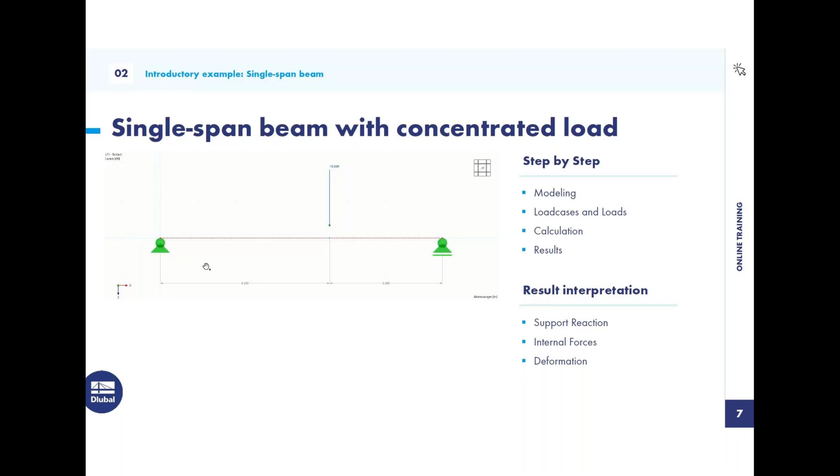Okay, then let's come to our first example. A single span beam with a length of 7.50 meters and a nodal load of 10 kilonewtons. First I will show you the modeling, then how I create such loads, then we will calculate it, and with Mia we make a check. So let's switch to RFEM. Okay, back to the user interface.

So, for example, nodes are the beginning of every model. Nodes are the start, and on these nodes you can put lines or members, and surfaces need these lines as borders. So for nodes, you can start here in the navigator data and click for a new node, and I will show you.

You can also do it here in the menu, under basic, nodes, or in the table you also have the option to create nodes with the coordinates, or even here with the shortcut. So you see you have different ways of modeling. Okay, then let's start. I will close this, and start with a new model. I call it online training.

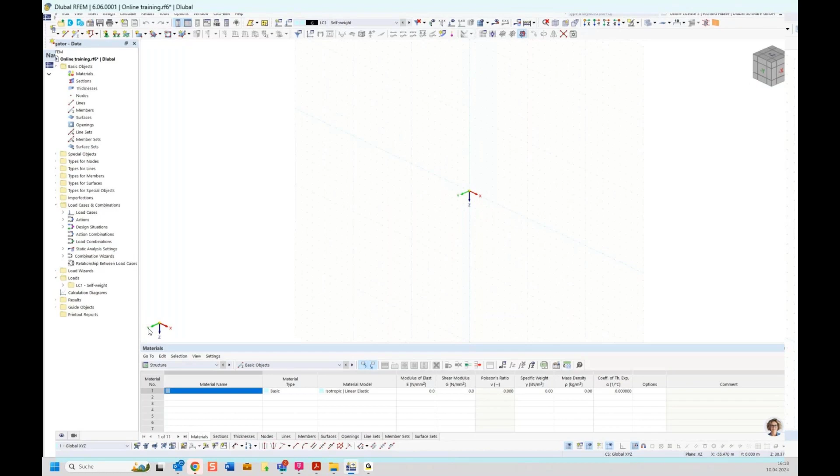Maybe a word on the view cube before we start modeling. You can left click on this cube and switch the views. As I said, it's connected to the global axis system. You see the Y direction when I click on Y, or when I go to X. The same idea applies here with views in X, Y, Z, or you can choose other directions here.

Another option: when you press Control and the middle mouse button, you can also rotate here. Okay, but let's start with the modeling. Our system, as I said, is a 7.50 meter long single span. So let's begin with the nodes.

I choose the shortcut here and left click on the 0, 0 coordinate. And now we have the first little problem. When I go here, we see 4 meters, and when I go here, 5 meters. We want it in the middle. Now we have different options.

First, I can click on this node, and in this case it fits perfectly because we start at the 0,0 coordinate. Then I could change the X coordinate to 450 and say OK. And now you see, OK, it's on the 450 how we want it.

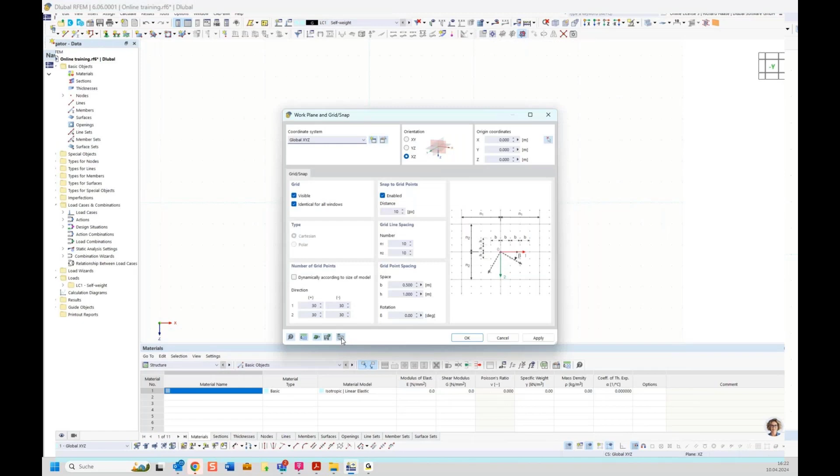Okay, then we need the last point at coordinate 750. Let's do it in this way. Okay. And maybe I set it back to the default setting. You can also do it here. Okay. So now we have 3 nodes. Oh, maybe I showed this before.

So when you left click and go from left to right, you see this color, and from right to left, you see this blue. So maybe I will continue first with a line. Let's go to the node, to this one, and again to this one. So when I go from left to right with this orange color, for example here over this line on this node, you see only this node gets selected.

But when I go from right to left, you see the line and the node are selected. So you have both options. With the orange color, only the objects completely inside this rectangle are selected, and with the blue you need only a little of the object and it's selected.

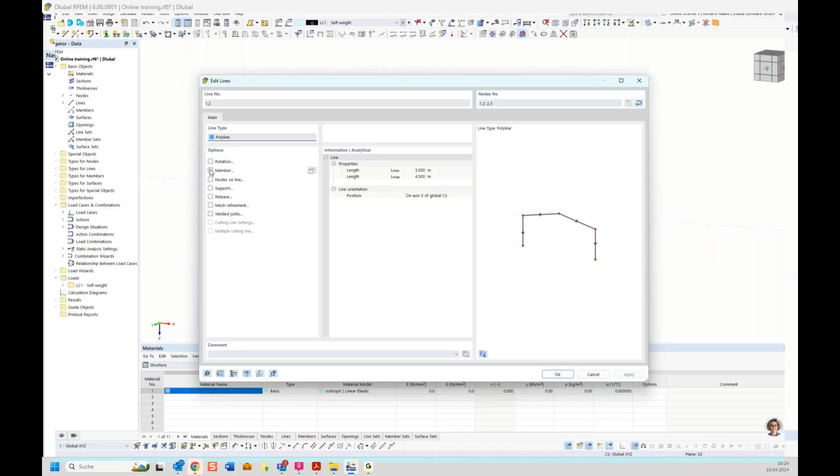So we have this line and want to transform this line or give this line some properties, and we say, okay, we want to transform this line to members. Then a new menu opens, the new member menu. And what can we see here? A member type. The beam is, I'd say, the default type. The beam gives all forces to other objects.

So, for example, when we go to tension, you can always orient yourself with these pictures. We see here all forces for the beam, and for tension you see only tension forces can be transferred to other objects. The same for compression, here only negative forces.

But let's go to another member type. Here is definable stiffness. Maybe it's interesting for you in your study time. You see we have a new tab here, definable stiffness, and we can create a new stiffness type here. And here you can manually define all stiffnesses, torsional stiffness, bending stiffness, and so on. Maybe it's perfect for your book exercises, and you can manually create your beam in this way.

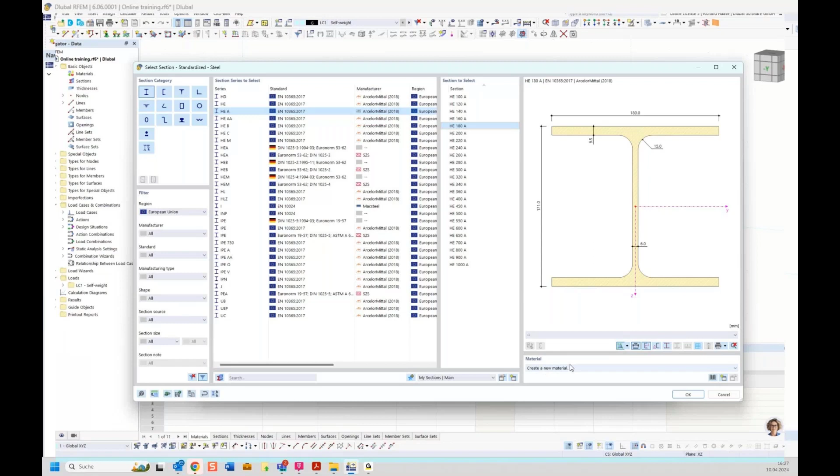Here also, what I said before, we start from a section. So when you create cross sections which are not tabulated here, you can import them from our section program. But let's take a standardized section. Let's say we want maybe such one here, 180. And now you see this yellow color because we haven't created a material. So let's create one.

There's again a library button. Let's say European Union, material type steel. And then you see, oh my God, so much steel. How can I find the steel I'm searching for? You see here this search function. Let's take S235, and the shown steel options are reduced. And here let's take this steel, say okay, and you see the yellow switches to blue.

Blue stands for steel in our program, and we say okay. Now we have an HEA 180 with the steel S235. Say okay and okay. And now we can see our property-less lines are transformed to such members.

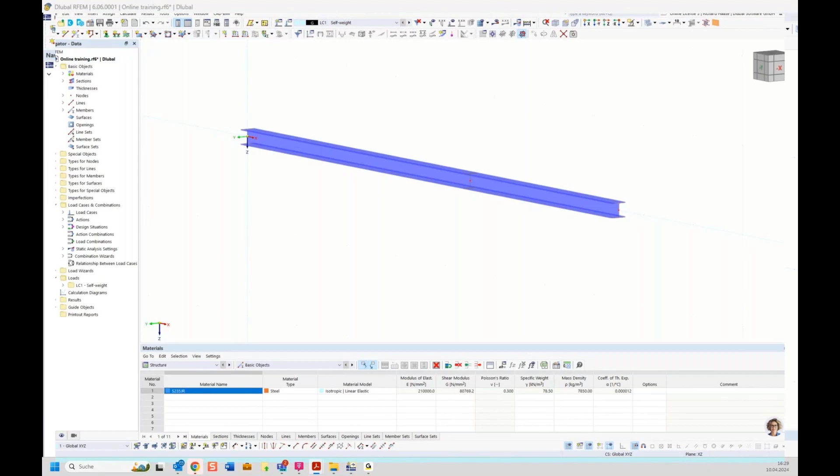Okay, so what we need are the supports we have here and the loads. But before I model this, I will give our AI assistant the chance, and she will calculate, and then we can compare the RFEM6 results to the results of our AI assistant. I copy from my document. I say here a single beam with a length of 7.50 meters with a single load at 4.50 with 10 kilonewton, and I want to know the bending moment at a length of 4.50. Then we start, and Mia shows us how good she is with her statics knowledge.

And in parallel we can model the nodal supports. When we go to this button, you see the degrees of freedom, the translational and the rotational. We say X direction and Z direction fixed. We want that on the left side. Say okay. And maybe when you click with the right mouse on this button, you can increase the size.

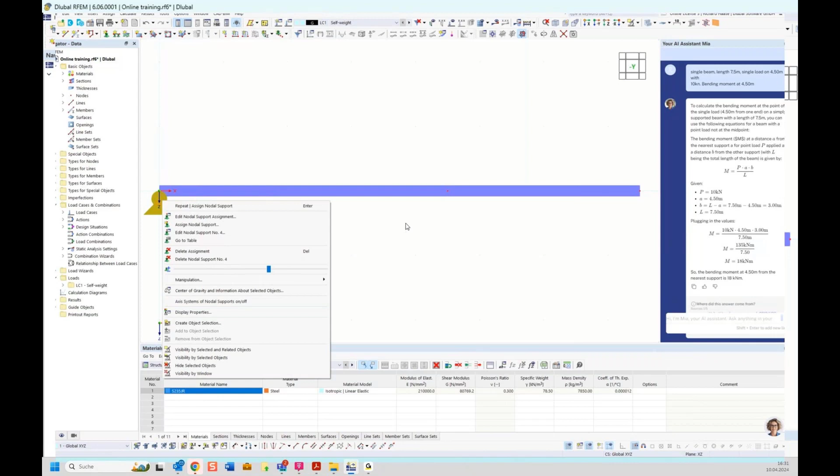Okay, we need another. We need here a nodal support with roller properties. Take our point. Okay. What is missing? Maybe to control the length again, you can click here for dimensions. Didn't I click on my first node? Oh, that was wrong, sorry. Linear on this node and this node. Then we must see the plane, and we must choose here the second plane. That's fine. And we see our length 4.50 meters. We have our control, our 7.50 meter long single span.

Now we need our nodal load. We have here the option loads, nodal loads. But you can already do it here in the shortcut, new nodal load, or even loads, nodal loads. So everywhere, also in the table, you have the option to model in different ways. Let's do it this way, a new nodal load on our load case self-weight, and take this 10 kilonewton, Z direction, on this node, say okay.

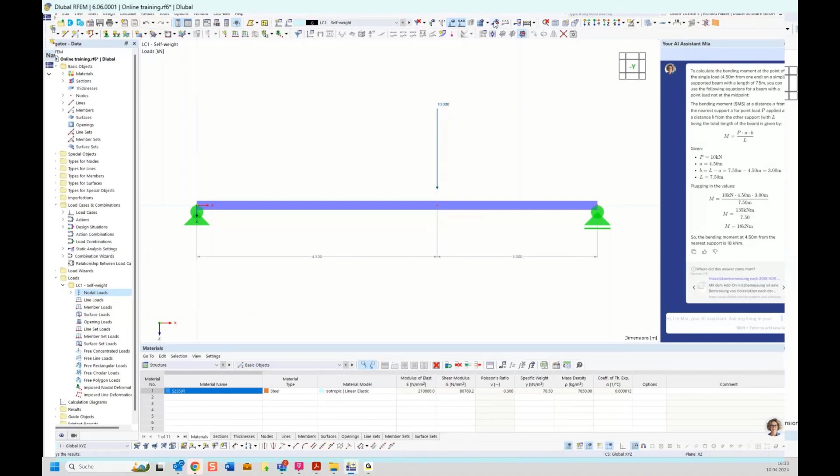And now we will check what Mia calculated. She says, at this point with formulas, and you can control it, we should get 18 kilonewton meter as bending moment at this point. Let's check it. On this button, you can start the calculation for this load case. You also have the option calculate all, or when you have more than one load case or a lot of load combinations, you can select what the program should calculate. Global deformations. You see the navigator results is new because we have calculated. But we want to go to the members, internal forces, and to the bending moment My.

Mia says we get 18 kilonewton meter, and our program says 20.4. So who's right? I say Mia is right, but what's the reason for this difference? Let's check the support reactions. We have 10 kilonewton from the top side, and see here 5.3, 7.3. It's higher than 10. So something must be wrong, or not wrong, but we must check something.

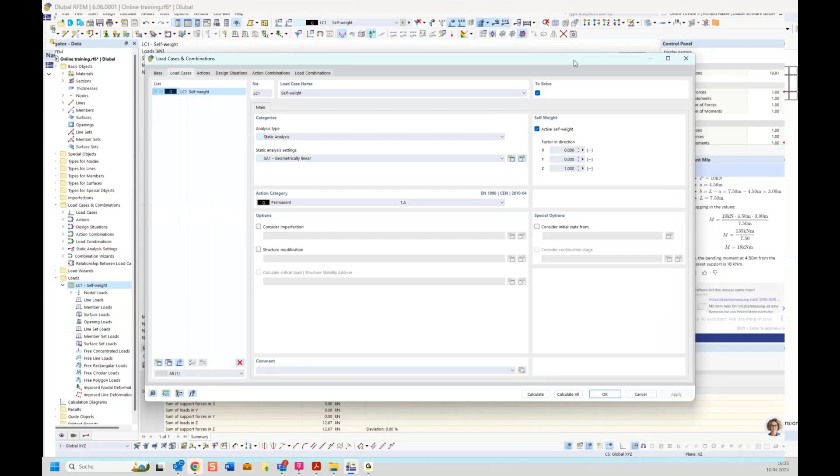The reason is the load case self-weight. When we go to edit, here we have an active self-weight in that direction. We have created our steel section, and this steel section puts its own self-weight on the structure. The default display setting is deactivated, but I show you how you can activate it. We go to the navigator, to the display, then loads and self-weight. And you see here the 0.356 is the self-weight of this HEA 180 profile. That's the reason why the results are not as expected.

So let's deactivate the active self-weight and calculate our self-weight load case again with our nodal load. Now you see here our 18 kilonewton meter, exactly what Mia said. So maybe Mia can assist you with statics questions, or even if you have questions about the program, you can write it here and Mia will give you answers. Good.

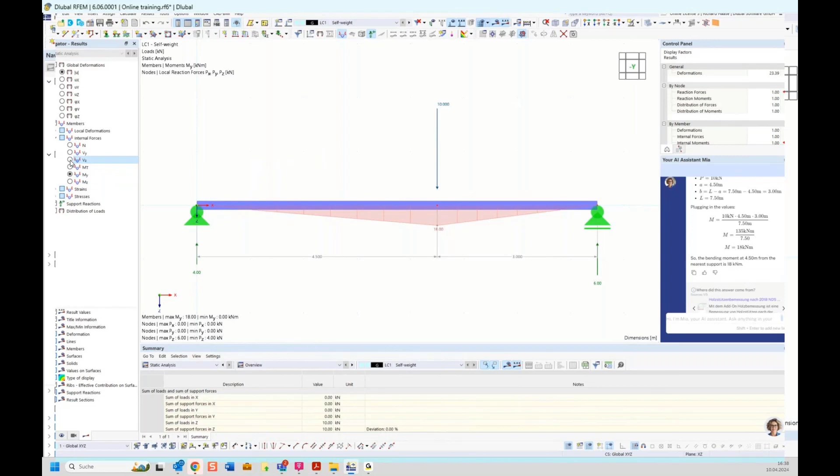So the internal forces. On one side we see the My, but we can also see the shear forces, 6, 4, and also the deformations. And those are the options, stresses, strains; you have a lot of options to see the results. Okay, that's enough for my first example.

Then let's go to the next, a two-span beam with alternating load positions. So we will create more than one load case, we will do three. And then I will show you the combination wizard from RFEM6, when you have different action types like self-weight, snow, wind, and so on, and how we combine them with the gamma and psi factors.

Okay, and another thing, but let's start with the modeling of our second example. Okay, Mia, thanks. Then I will delete my model. And yeah, we have 10 meters of the whole length. So you have the options with the nodes and with the lines I showed you before, but there is also a faster option.

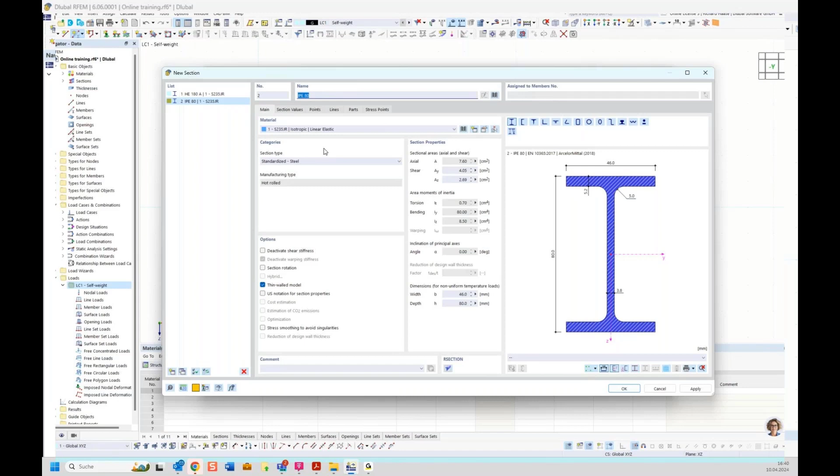You can create here a new single member. We switch to another profile. So I create here a new section for our member. And yeah, you have the options with the library, but you can also write here the name of the section, and RFEM will find the section too. Okay, we have a HEB 300, and now you see the fitting standard. Let's take this with the Euro norm, and we say OK. Say OK.

And from 0, and we want to go to 10 meters. You see, it's a faster way than selecting the nodes and then the lines and transforming the lines. So I want to show you the principle of RFEM6, because behind this member there are always the nodes and the lines, but that's the faster way. Good.

Now we have a single span, but we want a two-span beam. So we click with the right mouse on this member, divide member, and the distance. And now you have the option between percent and meter. And yeah, 50%, 5 meters, that's exactly what we want. So we divide our member and now have two 5 meter beams.

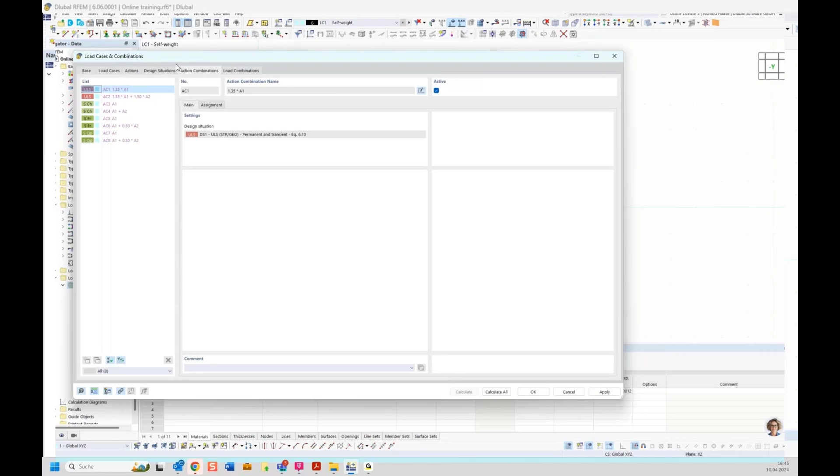Let's have a look at our ULS. So here you see Eurocode and information, the combination rules with these gamma and psi factors. Now we see it combines the actions, the A1 and A2 of our self-weight and the other action, and here the load combinations. Okay, maybe here it's not so interesting, but I have another example where we have more than these two load cases. But you can see here it combines all load combinations after this rule.

Okay, that's okay. And now for our load case 1, we want to create a new member load, right click, and have 2.5 on both members. And you see, okay, it's created. And for the left, the same, new member load. On the left field, we want 5 kilonewton per meter, on the left field. And now I could press the OK button, then close the load option here. But I want to continue with my right field.

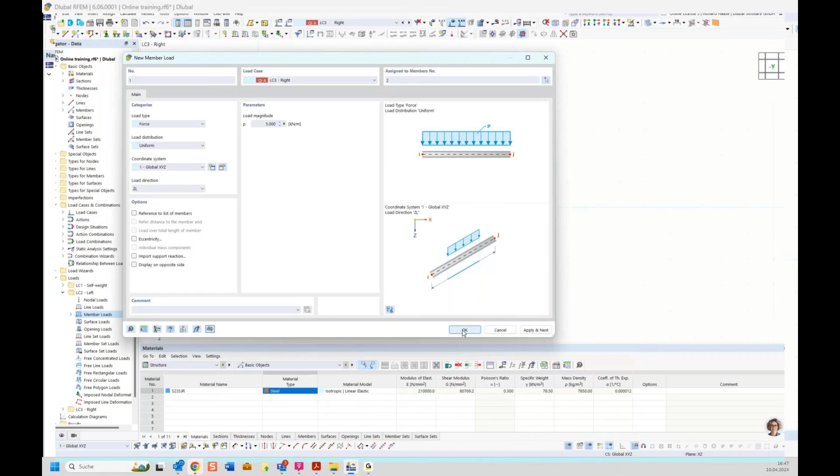So when I click here, apply and next, then I can see, okay, it's created, and I can easily switch to another load case. And okay, the same with 5 on the right field, and say okay. And now we are ready with our loads, and I close this with okay. Okay, and we can check it. We have the self-weight plus the self-weight of the HEB section, but I have deactivated it, but you can activate it again, then our left field load, and on the right.

Yeah, maybe when you make checks with examples from literature, then it could be possible that you get other results than in RFEM6. And the reason, I'll show you, you can see it in the sections. And you see here this option, deactivate shear stiffness. So the default setting is that RFEM6 calculates with the axial and the shear stiffnesses, but in literature examples, most of the time they don't calculate with this kind of stiffness. So you can click it here. So you deactivate it and make the shear stiffness infinite.

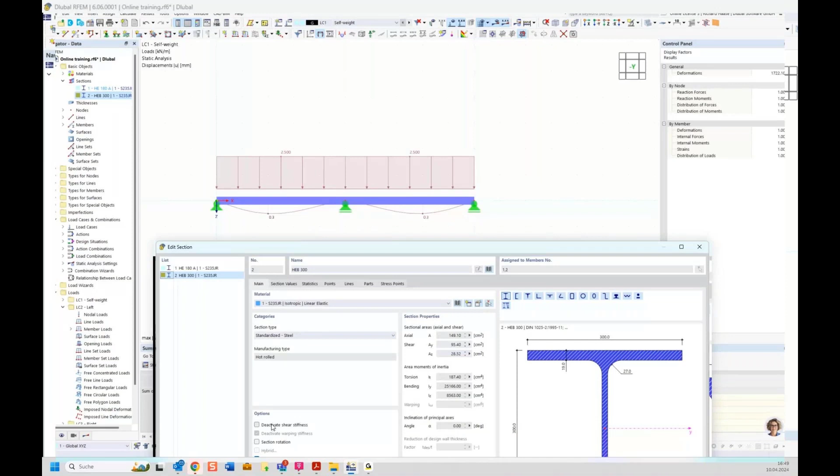Yeah, so I'll show you the difference with the shear stiffness. And yeah, let's show you on the self-weight. So you have here the show results. But let me show you another way to calculate. And we want to calculate the self-weight. Say OK. Okay, so when we see the deformations, we have 0.3 millimeters here. And when I deactivate the shear stiffness, so make the shear stiffness infinite, let's see, we have 0.3. Say OK.

We get only 0.2, so the system gets more stiffness because the shear stiffness is not, or the shear stiffness is with an infinity size. So you must know this if you calculate it with literature examples. Then deactivate it here, but I'll let it stay active for our example. Okay, good. Then let's calculate all.

And then I'll show you the results and explain something. Maybe we can choose the wireframe model here, it's then better visible.

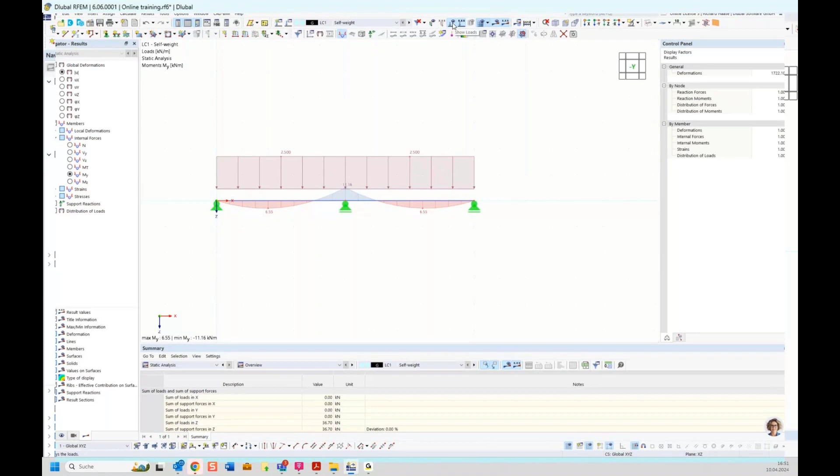Let's see the bending moments, My. We can also deactivate our self-weight and show the loads. Okay, and we switch to our design situation. And now we see, okay, we have here max and min values.

And why do we get this in this design situation? The reason is, I'll show you how he creates this after the combination rules. And for the ULS, you see, okay, he has 4 combinations in this case. And out of these 4, on every location, he shows you the min and max values.

So now we want to know where this result comes from. This minus 37, which combination gives us this result? Therefore you go here to static analysis, results by member, go to internal forces, and now we're at member 1, that's right, on the end of member 1.

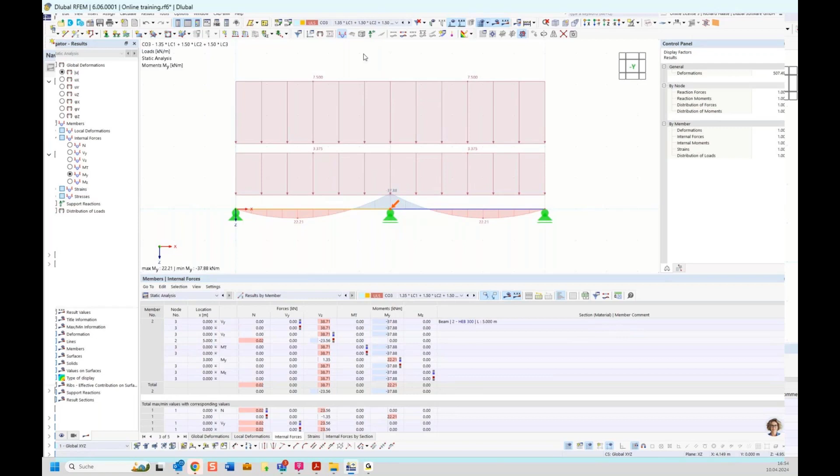The same you can do for the support reactions. So maybe deactivate the member results, and let's see our support reactions. Now we want to know where this 77 kilonewton comes from. Same principle: results by member, you must switch to results by node, because on this node is the support. Results by node, and switch here to support forces.

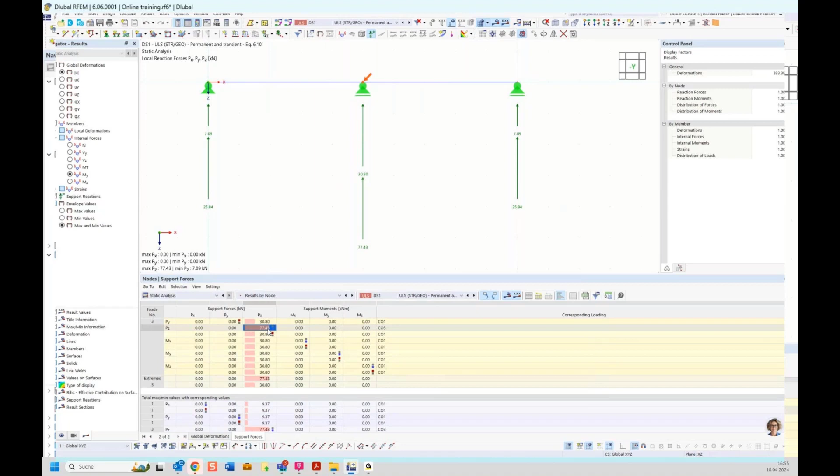And now, okay, see here, that's number 1, and we want to go to number 3. And you can see here number 3, and here we have the 77, which also comes from combination number 3. And combination number 3 was, you see it here, self-weight, left and right field load cases. So that fits well too.

Yeah, that was the second example. Then let's switch to the PowerPoint presentation. And yeah, the next example is a Gerber beam, or hinged beam.

And this system you see, it's maybe the same looking, this 2-span beam, only here is a hinge. Through the hinge, this 2-span beam gets statically determined. So they're a coupled system of a single span to a single span with a cantilever.

And yeah, how do we want to create such a Gerber beam? In Germany, we have a book with a lot of tables and formulas. And we see here a Gerber beam with 2 times the same length and a formula for the location of the hinge.

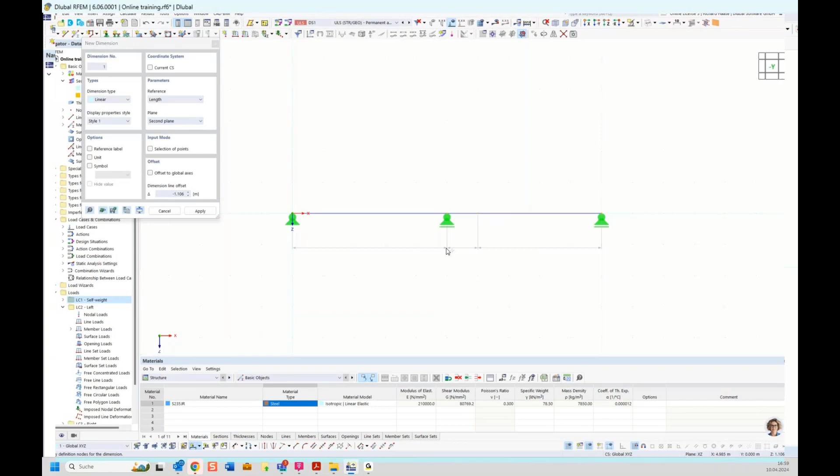Again the second plane. Okay, for control. And yeah, you see, say here, okay, maybe through the new GoToWebinar, the program said goodbye. Let's start again, RFEM6, one moment.

Yeah, and another point for this Gerber beam is, you see the maximum field bending moment is exactly the moment over the support. And it's for the design check more easy when you have one size for the choice of the section.

Oh, sorry, I opened the German one. I switch back to English, sorry.

One little moment, please. Okay, now it's open. I think you don't save it. Okay, then let's close and make new.

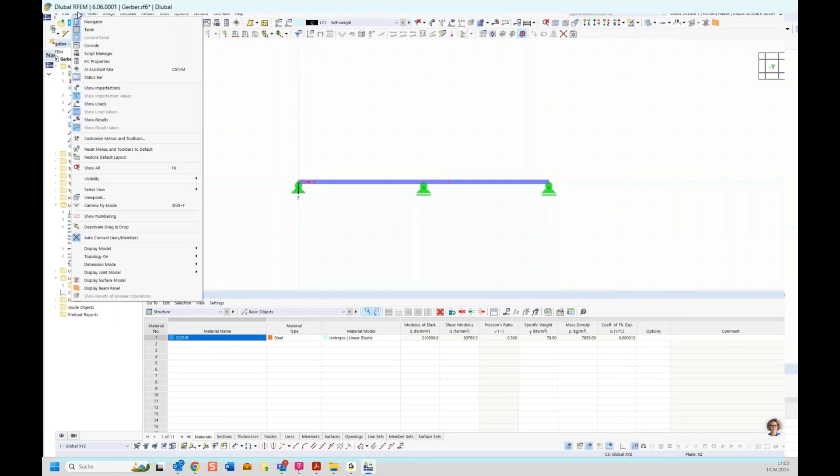So first, wait. Okay, I will customize. Oh, wrong. Reset menus and toolbars to default.

Okay, so now I show you how you parameterize your model. So the command is here under Edit Global Parameters. So it's a little bit hidden. So when you remember, I told you at the beginning that we have such a search function here, and you can type global parameters, so you can find it there.

Or when you're working more often with this command, you can customize your toolbar, and therefore you go to View, Customize, Menus and Toolbars, and go here for global parameters. And every command you can find here or over this searching function. And I want to say, okay, this global parameters I want to add in my toolbar. Then left click, hold the left click, and I will add it here.

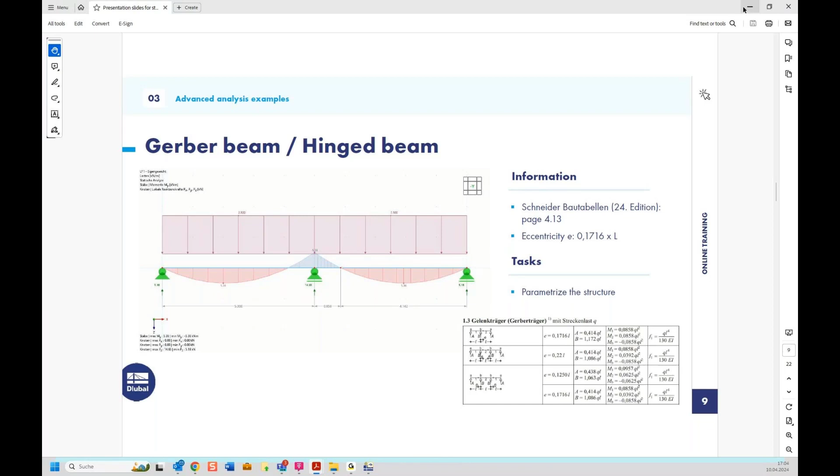And here, let's say Gerber or hinge. You can select it how you want. And here we have a definition type of value. And because of this formula, we can add this formula too. But maybe, oh no. We can switch between value and formula. Let's choose formula here. And you see now our formula field here is available.

So important is when you choose such formulas, you must use a dot instead of a comma. Otherwise RFEM6 gets problems to understand. So from our table book, it was 0.1716, the field length, but this is only, it would be here, but we want to have our Gerber hinge here, so we must say another field length. And now we see, okay, it's at 5 meter.

Now say, okay, now we have our global parameters, and now we must connect our model with these parameters. So we go to, oh wait, before I forget, our dimensions. Okay.

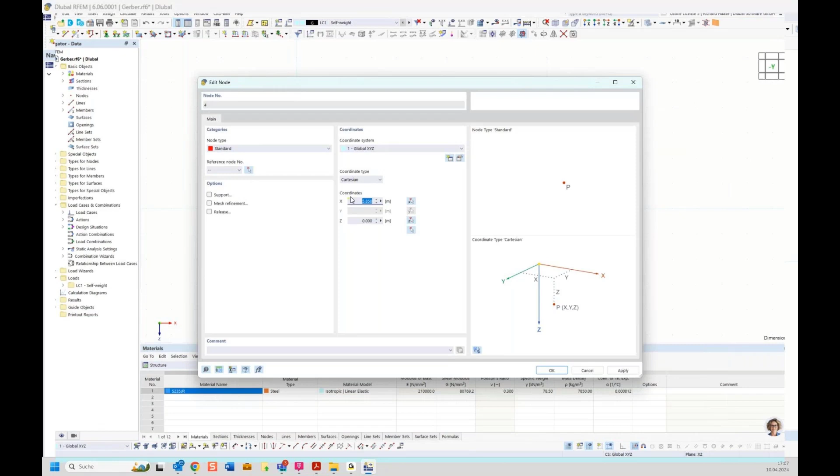And now our Gerber hinge. Say again global parameter. Want to have our Gerber, and you see our 5 meter 858 again with the yellow symbol. Okay, and you see before it was on 1 meter, and you see it switched the length.

Okay, the last thing which is missing is our hinge. So let's go to the member, and again the same principle. So we want a hinge. Important is here you see in this direction, so this is the start, and this is the end of the member. So we need a hinge at the start point. So we click hinge. We get a new tab here, hinge, and we want a member hinge at the start.

And yeah, a rotational hinge, is that what we want to have? Say okay, and here we see our hinge. It's all the time the biggest size, but you can decrease or increase the size here again.

Okay, so then let's view the self-weight load case if it functions. And global deformation we don't want to see. We want to see members, internal forces, and bending moment My. And we see here the same results in a field and over the support.

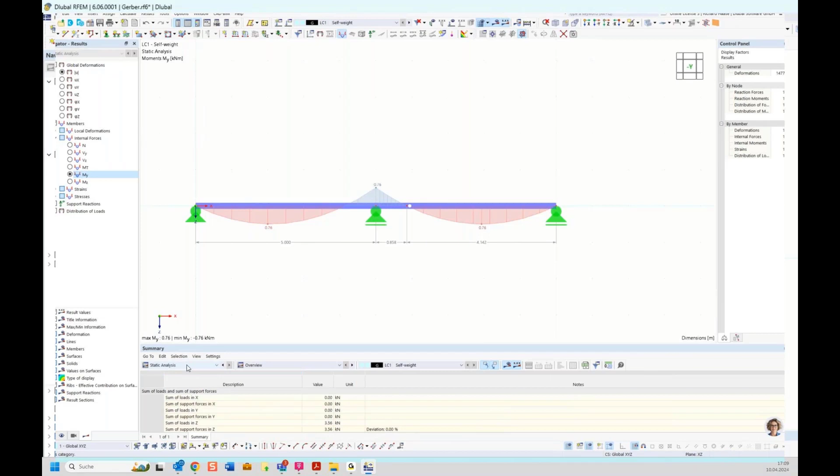And now we want to check if the parameterization function works. So when I say okay, I don't want 5, I want 7 meter field length. Okay, it's a little bit big, so, and say okay. So you see 7 meter and 7 meter, and the hinge also spring. So then let's prove it.

Yeah, you see a little difference, but 1.50, so we can say it's right. And now you have a parameterized Gerber system, and this parameterization you can use for all models you can imagine. If you have such systems more often than one time, that's really good and saves a lot of time.

Okay, that was this example. Now, at the time we only used the member type. Now I want to show you a frame with a tension member and show you the effect of such member types, and also the combination - here we want to model snow, wind, and temperature.

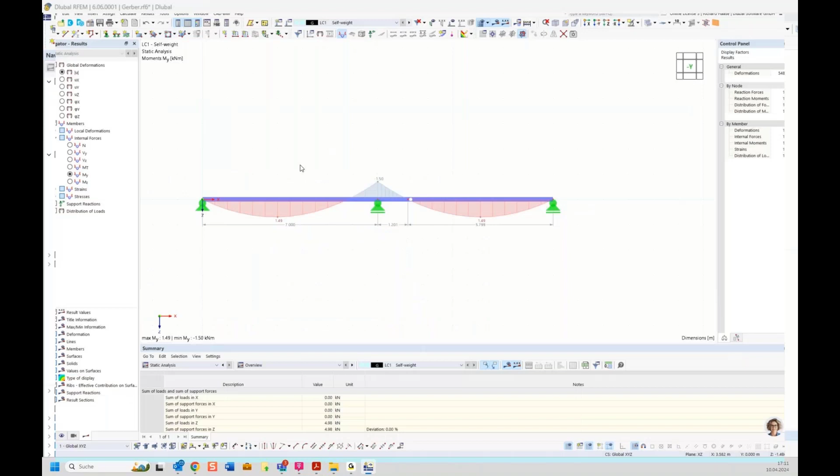Okay, then we can delete it here. Sorry. Okay, let's create our frame. So we have again our HEB 300, say okay, and 5 meters in height, and 5 meters, and 1, 2, 3.

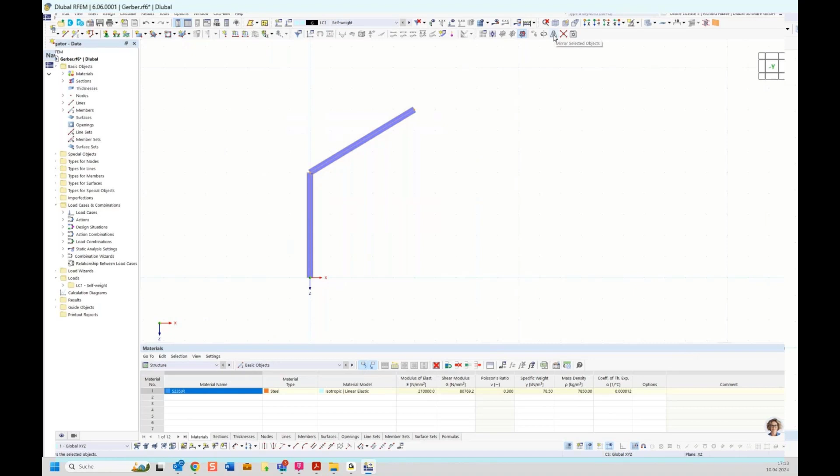Now, our frame is symmetric, so you have the option to draw two other beams, but I will show you an option. Here it's fast, but when you have a big hall and it's all symmetric, you only need to model one half and the other you can make here. You can mirror the objects, and now I will show you how it functions.

So you select your objects and say mirror selected objects, and you want to create a copy and must select the plane - you want as mirror plane the YZ. So you must change it here to YZ and change a point - say here this top point - and say okay, and now you see you mirrored your system. For bigger systems, or symmetric and big systems, it saves a lot of time, and it's a very nice function.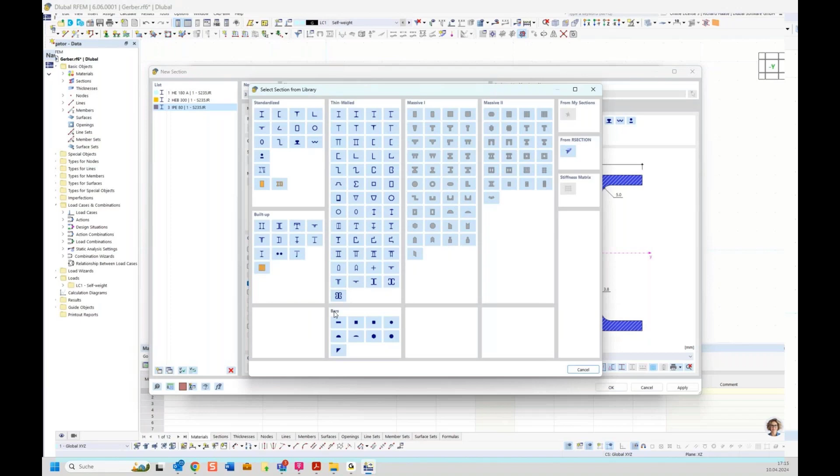Okay, then let's add our nodal supports here and here. And for the end, our tension beam - let's go again to new single member, node to node beam. Now we want our tension member to only have positive forces. Okay, and select him here. Oh, it's the wrong section type, but let's change that fast. We go to the library and want a bar type, a round bar with 30 millimeters. Say okay. Okay, it looks better. Good.

Then I want to show you first the loads. Let's make a new load case. We have here snow we want to have, and another wind - you must choose a fitting action category - and another one temperature, with action category temperature.

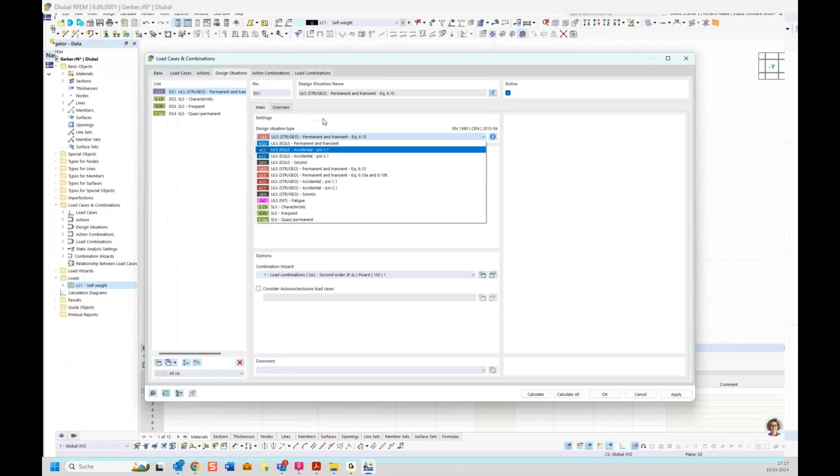Okay, so now we go to actions. You see now we have here on these symbols also that fitting action category, and now it's interesting, and saves also a lot of time - this automatic load combinations with the combination wizard. That's only the self weight, but look here, we have self weight, snow and wind with a leading action category, and the not-leading get the psi factors. So, and this is very good, and you have more for fatigue or for seismic - different rules - and with the help of the wizard, you don't need to make it manual. It's fast, and you're on the safe side and have all possible combinations.

Okay, then let's say OK. I think it's really the problem of the new GoToWebinar. Sorry for that. That's not the standard fault. I will start RFEM new. Okay, restore - I hope he saved it.

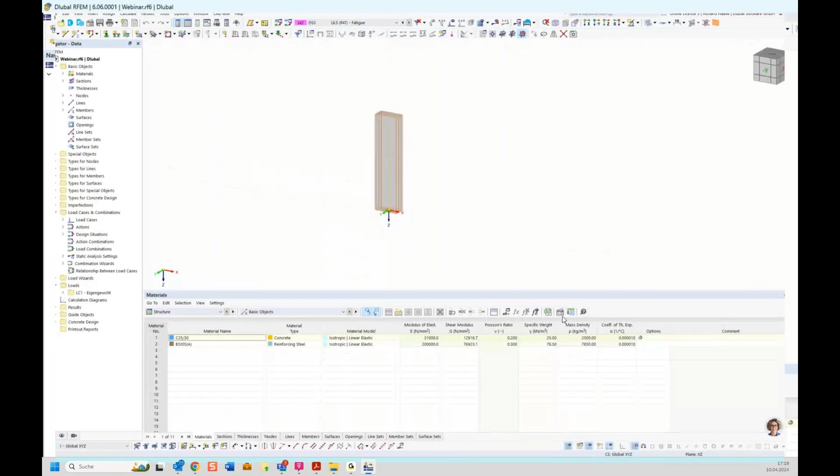Okay, then let's fix modeling it again. Wait, maybe I have it here - Gerber, maybe. Okay, then I have some right materials. Okay, so we had here our 5 meters. Okay. I started new - must depend on this new GoToWebinar. Normally it doesn't crash. Cannot be moved. Okay. Then I will try it again, and he is away again. Okay, one more time.

Otherwise, we can maybe go into the coffee break, and I can try to either model it afterwards, or we leave this example. Oh, okay, maybe yeah, it's a better idea. Yeah, okay, maybe my PC is getting some problems with the new GoToWebinar. Then let's do it in this way. Let's go into the coffee break. Jonas, what do you say? Maybe 10 minutes? Yes, let's make a coffee break until 5:30, and then in 10 minutes we meet again and go further and explore some new realms in RFEM. Okay, all right. Yeah, okay, then have a good break. See you guys.

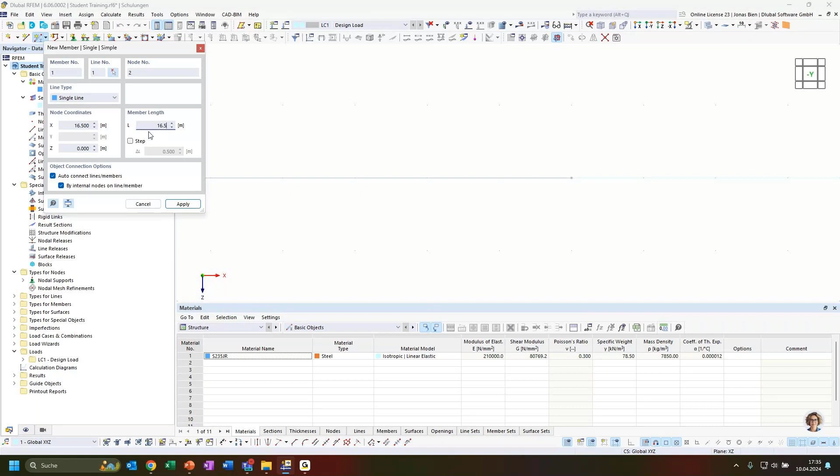All right. So first of all, we model the single span beam. So therefore, we create a new member with a member type beam. The section would be HEB 300. Click OK. The length should be 16 meter 50. So I don't have a point to grab here, so it's actually hard to find the correct length. So therefore, I would just use this input dialog to set the length to exactly 16 meter 50.

The important part, if you use that, is that you don't go back into the window or into the graphical user interface. So if I type in something here and then go back to the main window of RFEM, it will directly overwrite my input value. So I need to make sure that when I input this value, I hit enter or apply before I leave this window here with my mouse cursor.

All right. Alternatively, one other solution would be to adjust the grid or to manually change the coordinate of the second node. There are multiple ways to define the beam of this exact length. Then we add two additional nodes on this member where we want to connect the vertical truss members. So I divide this member by two intermediate nodes, and I set the option to create nodes on member because I don't have to divide this member. It can stay one single beam element.

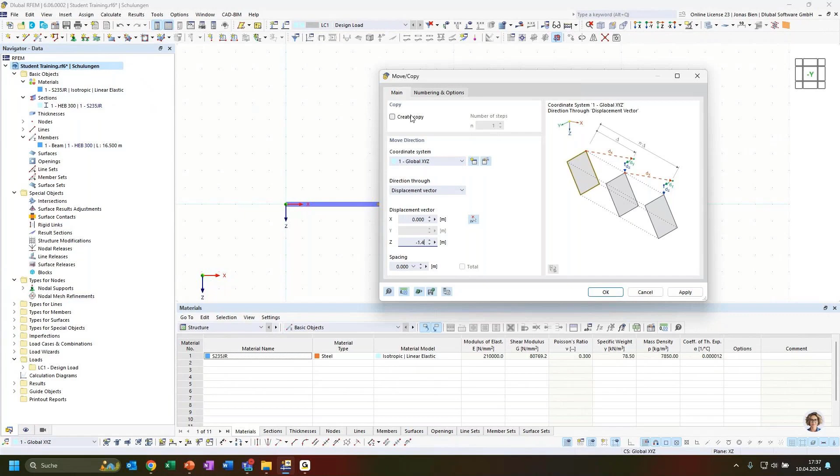my copy function. And I think the best option would be to take the nodes on member, so the intermediate nodes, select them, go to the copy function, and say I want to copy these nodes in Z direction by -1.4 meters. And then I need to make sure that I want to create a copy. Originally they were nodes on member, but when I copy them away from this object, they are directly transferred into nodes of the type standard. And now I could define my truss members between the two nodes.

What I could also do, and I want to show you that alternative option. Here it doesn't make so much sense, but in larger structures, that's a very nice feature that you can leverage to speed up a modeling process. So I again select the two intermediate nodes, want to create a copy, and then I say in the additional options, I want to use step links.

And that gives me the option to not only copy the nodes, but to directly create lines between the two nodes. And I can also on these lines directly create members. So when I hit OK now, it would copy the nodes, create lines between the base nodes and the newly created nodes, and create members. And how this member should look like, I have to define.

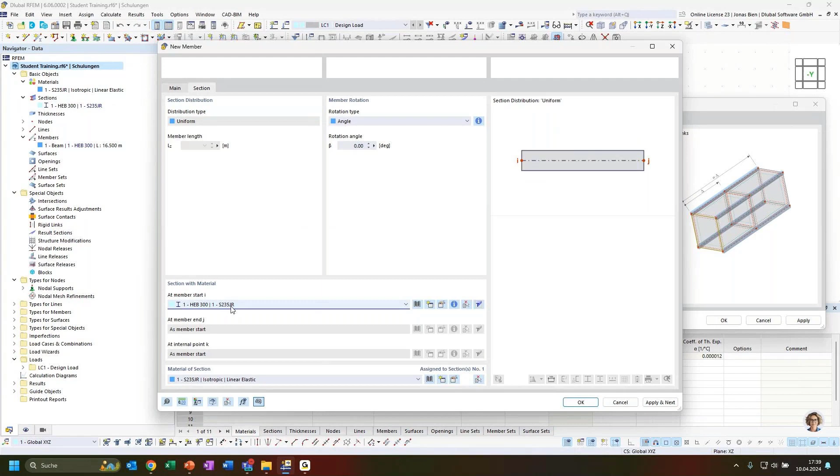I could either give a template member from my structure, or I define a new template, and that I want to do because this definition of this member should differ from the first beam I defined. So I want now to have a truss member, and the section shouldn't be HEB 300, but it should be an IPE 200 beam. So I create a new section via the quick search up here, and create a new section number 2 of the type IPE 200.

Okay. One thing to add, Richard already told you that on the right side here you see which degrees of freedom these member types have, and there's a very nice indication on what internal forces are transferred at the end nodes. If you are unsure, you can always use our online help manual. In all of the dialogues you find this little box in the lower left corner, which you can click, and it will open not only the correct online manual for the program you are using, but also the correct section with respect to where you are opening it from.

So I would directly come to the edit sections dialog, and I could quickly browse through the different member types and get additional information. So that's a very nice way to get first help. We also have linked additional webinars or articles that are relevant for the manual. So this is a very nice and quick way to get additional information.

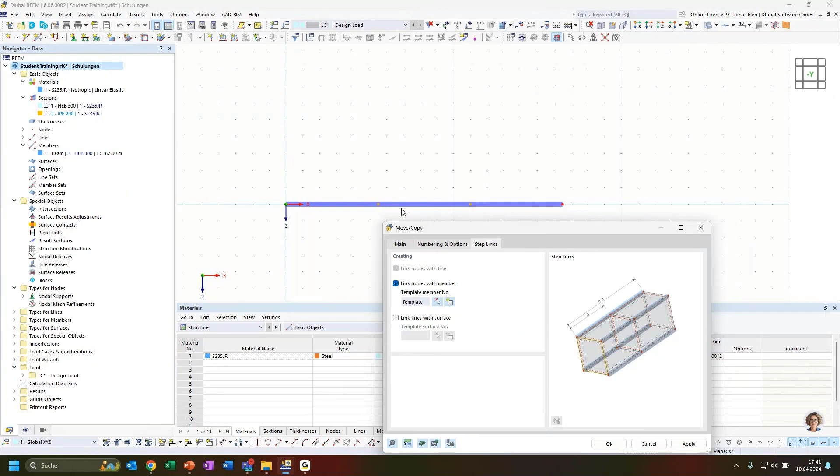All right. So the truss member is like a beam that has moment releases at its ends, and I will use this member type for the secondary support structure. And now I have finished the definition of the beams that I want to create with this move copy command, and then I click OK. And now you can see with the copy command for these nodes, I have directly 2 additional members, and I don't need to do anything with this. So that's already quite nice.

What is also nice, I can also enter values with units. So if I type in 2,300 millimeters, it will automatically convert it to the unit that I use for this particular input. So this is very smart. But in this case, I wasn't very smart. I didn't want to create additional members between the 2 nodes that I copied. So I just delete these by selecting them and clicking the delete button.

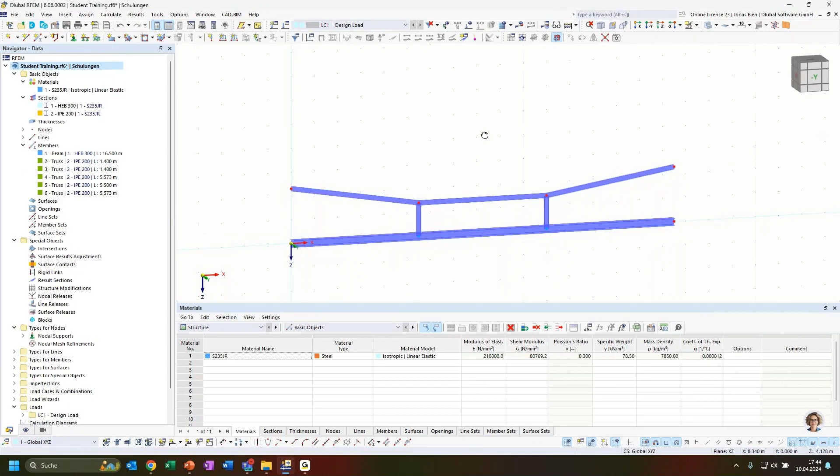So now I have defined all the members, and I can already see that they have different cross sections when I activate the rendered view. Up here you can toggle between different display modes for members: a transparent rendered mode, the wireframe model, and the solid rendered mode. But sometimes it's hard to see if there are really different sections. They could have the same height, but different section dimensions.

And in that context, I want to show you another function that allows you to easily distinguish between different sections or beam types. You can go to the Display Navigator tab, which is the second here in our navigator. And under colors of rendered objects, you can color the members by their properties. For example, you can color them by member type.

And if I activate that, I see that this lower member now is colored in blue, and blue stands for beam member type. And the rest of the structure is colored in green, which stands for truss member type. And I can also do that for section, for example, to highlight that I have different sections in my model. And on the right side in the control panel, I automatically get the corresponding legend to the current setting. So this is also quite nice to get a better overview of the elements and objects that you have defined in your model.

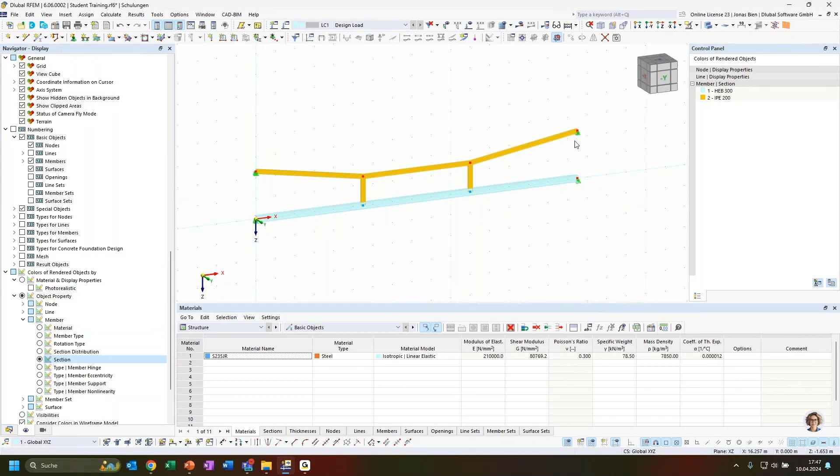And since the lower member should just be a single span beam, and I don't want to get any additional restraints in the horizontal direction of this beam, I assign a roller support to the member end, so it can move freely in X direction. If I would apply the same boundary conditions to the upper support structure, it wouldn't make a lot of sense, because here I need this horizontal restraint to actually make the upper structure stiff.

I can imagine that when I now in the last step load my lower member, this beam member, with a vertical load of 15 kilonewton per meter, I just do that right now. Then the secondary truss member structure above it provides some elastic supports at the thirds of the single span member, and of course the stiffness of the support depends on the stiffness of the nodal supports here at the ends, also on the truss member stiffnesses and the length and so on.

And if these wouldn't be fixed in the X direction, they would just move towards each other, and I wouldn't have any additional supports provided by this upper substructure here. All right, so now everything is set for the analysis. I've defined my members, I've defined the load, I've defined the supports. So I actually can now run the simulation. I do that by asking for the results, but of course I don't have any results, so it automatically calculates.

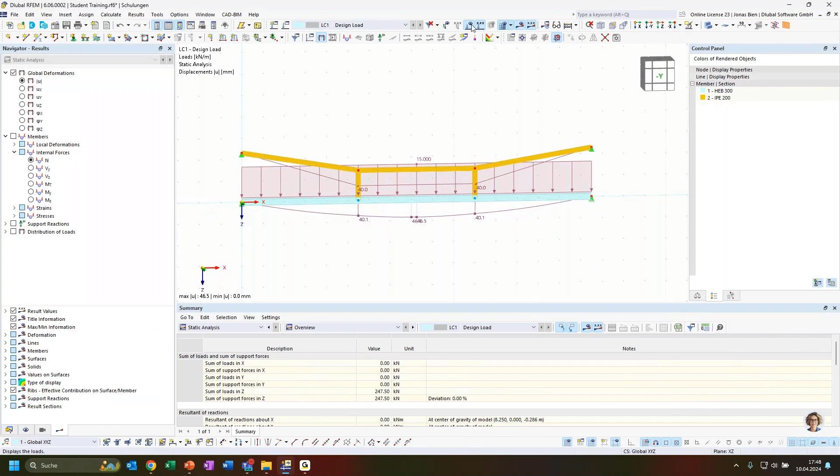And then I can access the results navigator and first look into my global deformations. I will switch off the loads just to make it a bit easier to see those deformations. And then I could also switch the display of these deformations. For example, I mostly like to analyze member deformations by using this option to show the sections colored, because in this way I not only get the deformation of this wireframe model, but I can directly see the intensity of the deformation by the plotted color.

And moreover, I could already see if there would be some torsion in the members. I could see that by the display of this cross section, whereas in the wireframe model, I can only see the overall deformation of a certain point along the member. So that's also useful. And what I see now is that I have around 45 millimeter maximum displacement at the midsection of the single span beam down here. And of course, the upper support structure is also deforming with it.

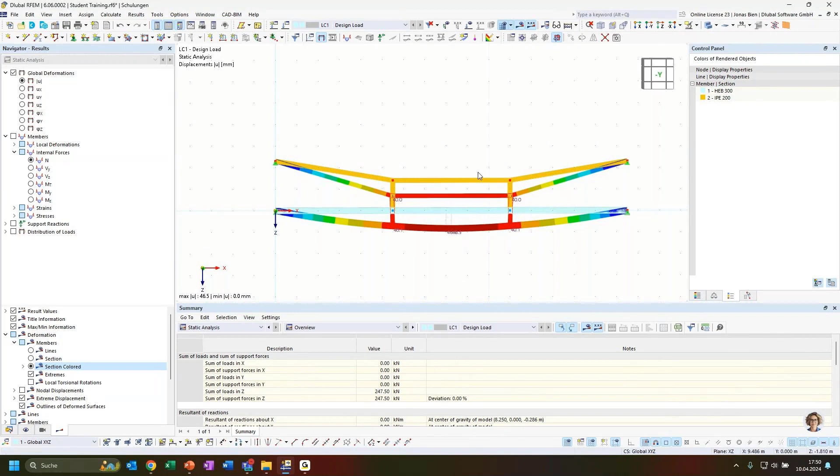It's elongating in these truss members, because all of them should be under tension, and we can check that if we proceed and go to the internal forces in our system. To better read the forces, I go to the wireframe model and deactivate the rendering, and now I can see that I have very large tensile forces in this supporting structure above, and a vertical normal force in these vertical members of 40 kilonewtons, and these would be, so to say, the support forces for these intermediate supports of this single span beam.

The beam itself is free of axial forces, because I released the horizontal support condition at the member end, but the single span beam below has vertical shear forces and also bending moments around the strong axis. And by this jump in the shear forces, I can see that part of the shear forces are transferred to the upper substructure. But the exact values I couldn't read from this diagram because I only get the extreme values and the values at the end of each member.

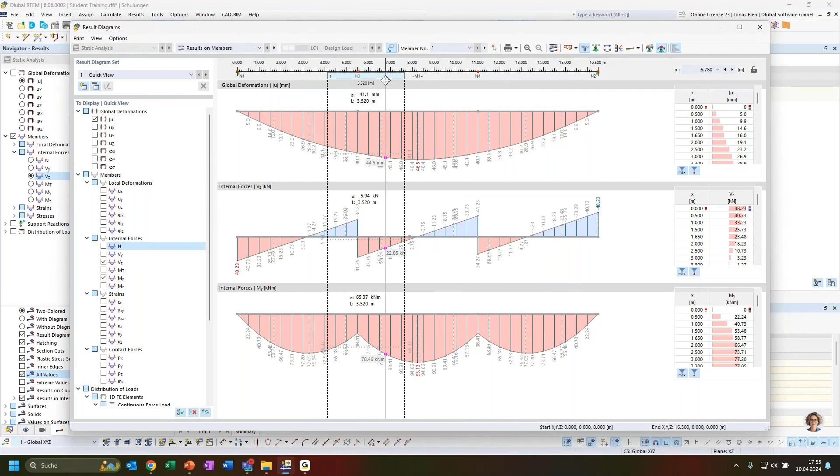Moreover, I have the possibility to average some results. I can just double click up here in this x-axis bar, and then I can create an averaging region, and it automatically calculates the average result value in this particular region, and I can interactively move it over the length of my member to get the mean value or average value within this window here. This can also be helpful in some cases, like if you want to have average support reactions or something like this, you can use this function.

This also works for multiple beams. So if I select the 3 upper truss members here and open the result diagram option, it shows me the results for all these 3 members. It indicates that on top here, saying that the first section represents member number 4 from node 7 to node 5, then member number 5 from node 5 to node 6, and member number 6 finally. So that's also quite nice. All right, that's what I wanted to show you in the context of this particular example.

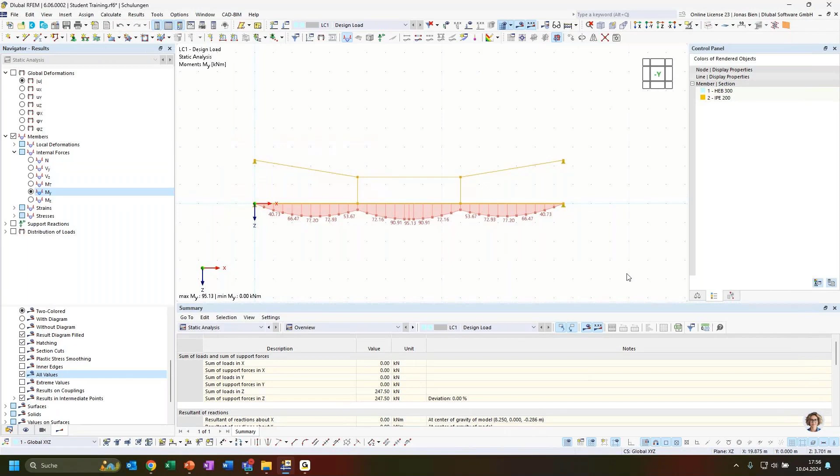If there are no open questions, I would proceed with the next one. Therefore, I just delete the complete structure and show what task is next on the list. So the next exercise would be to investigate a truss structure, and it says it should be an ideal truss structure, or we want to model an ideal truss structure. And what does this actually mean?

It means that we have only axial forces in the members, and for this to be true, we need some implicit assumptions, which are that we have perfect hinges in the connection of our truss members, that we have no imperfections of our members, so they are straight and have a perfect geometry. We don't have any eccentricity in our connection of the members. In reality, it is often the case that the system lines of the members, for example in this node that I highlight here between the upper chord and the diagonals, are not in line. Often it is not possible.

Then we only have applied loads on the nodes between members. So we don't have any intermediate loads or uniform member loads. Even the self weight of the members is neglected. And these assumptions lead to a truss structure that is only loaded internally with axial forces, and we will try to model that in the next couple minutes.

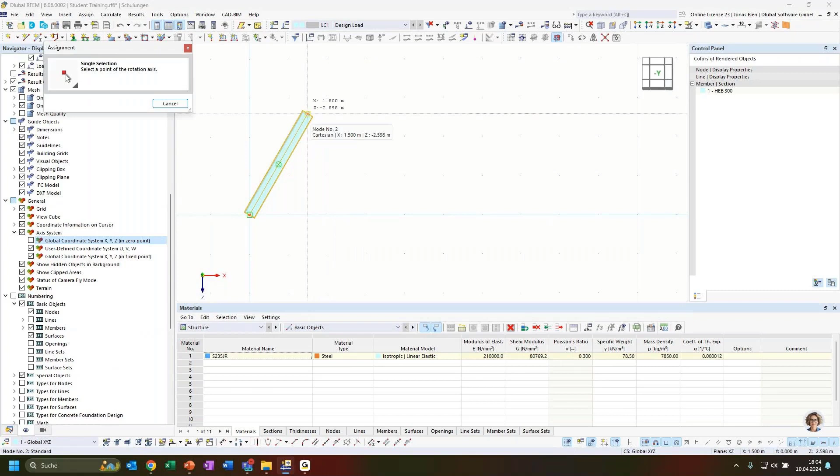Now I want to get the other diagonal and also the upper chord. One clever way to do this, and this also allows me to introduce another option for member generation, would be to use the rotate function. So I select my member that I defined and choose to copy this member by rotating it. I want to create 2 additional copies. The rotation angle should be 60 degrees, and it should do this rotation around the y-axis. That's correct, the y-axis is pointing out of the working plane. But the origin of this rotation should be my member end, so the upper end of the first member that I have defined.

And if I now click on OK, I directly get 2 additional members that are rotated by 60 degrees respectively. I can also measure this just to show you. I can measure the angle between the 2 members, and you see it's rotated by exactly 60 degrees. Okay, so that would be a good starting point.

Of course, now I need to add additional diagonals and upper chords to the model to finish my truss structure. To do this, I can use the drag and drop function. So I can just select all the members and nodes I have defined so far, click next to the lower left node, because that would be the node that I want to connect when I copy this piece of the model, and then hold the Shift and Control buttons at the same time on my keyboard, and then with left click and going somewhere in my working window I can copy this substructure, and I can also snap to the existing node or some grid points to place this substructure another time at this location.

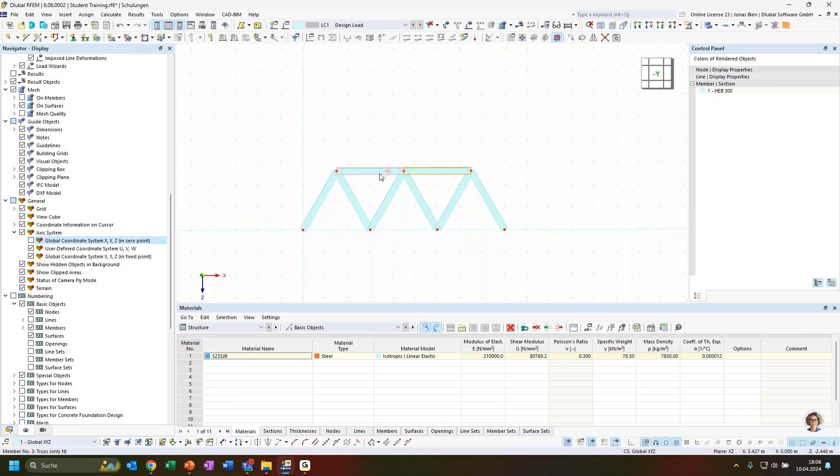I want to connect it with the first one, so I could just do it like this, and I would have 3 additional members very quickly. I could also just choose these 2 diagonals, copy them the same way, and that would be a big step towards the finished truss. I can also copy the upper chord the same way, just selecting the upper 2 members, Shift and Control, left clicking, dragging it to another control node, and that's how you easily finish this truss structure by just copying some substructures or pieces of the complete structure with the drag and drop command. That's very convenient and can be done with many objects, not only with nodes or members, but also with special objects.

So that just leaves me with the missing vertical truss members that divide my triangles by half. I generate additional truss members by selecting the upper node of my first triangle, then I can snap to the midpoint of the first member of the lower chord. There is by default a snapping point I can use to generate this truss member.

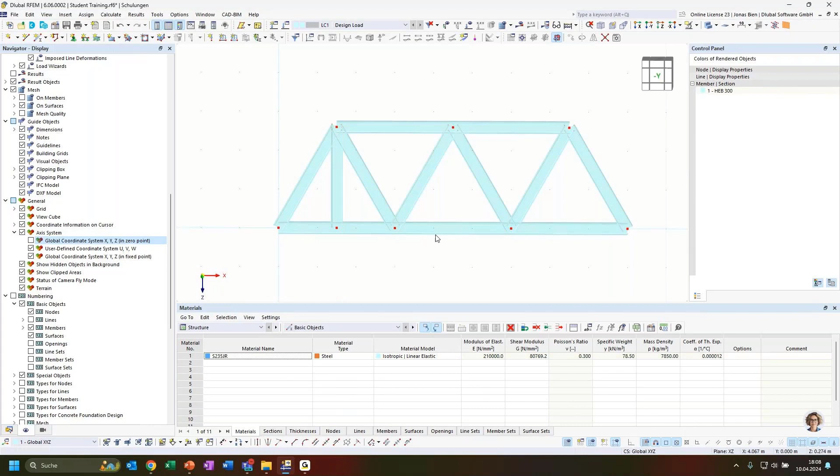Once I have defined the first one, I could use drag and drop to copy them to the remaining locations where I need them. Or in this case, because I need to copy it 4 times, I can do it quicker using the copy command, since here I can copy multiple times in one operation. So I can create 4 copies and just need to define the displacement vector, from where to where it should move and copy the selected member.

I can define this displacement vector by just clicking 2 nodes, and now it will copy this member 4 times. The distance between the copies will be 1.50 meters in the X direction. I hit apply, and with one operation I get all the vertical members that were left.

Okay, then I need supports. I assign nodal supports to the end nodes of the lower chord. The left node will be fixed in Z and X direction, and the second node will be a roller support. So I have no restraints in my model — it's statically perfectly determined this way.

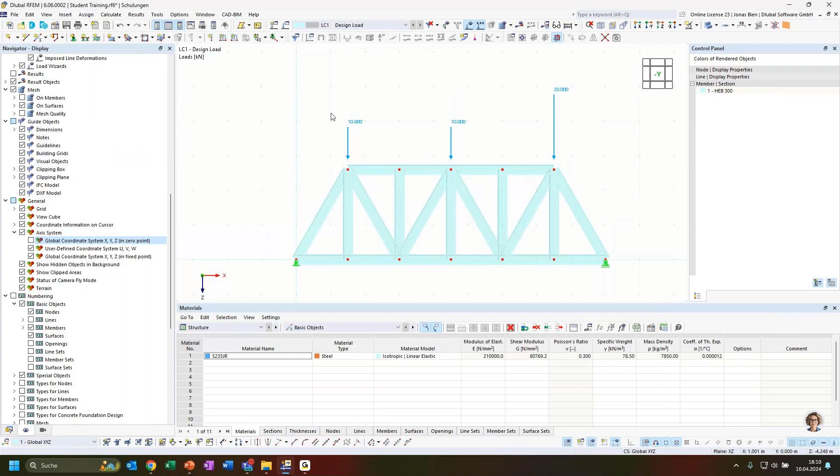And then I need loads. In the description of this task, it said we should apply 10 kilonewtons to the first and the second top node of the triangles, and a load of 20 kilonewton to the last node here, in Z direction of course. And yeah, that would be basically it.

This is a bit hard to see, so I can also switch to the default display properties. I can always go back to the default options if you've modified something here but can't find a way to turn it back — you can just set everything back to the Dlubal standard. That would help you get a good default setting for your display, by just clicking here in the navigator and right-clicking to get the option to reset to Dlubal standard.

Okay, now let's solve this model with the applied loading and try to solve the tasks that were asked. Again we can check the global deformations, but nothing too crazy happens here — everything we see is expected, I would say. But the interesting part is when we look at the internal forces. Just to make sure we now have only axial forces in the system, we can go through them and find that we only have values for the internal axial forces, N, and these ones we want to investigate a bit more deeply.

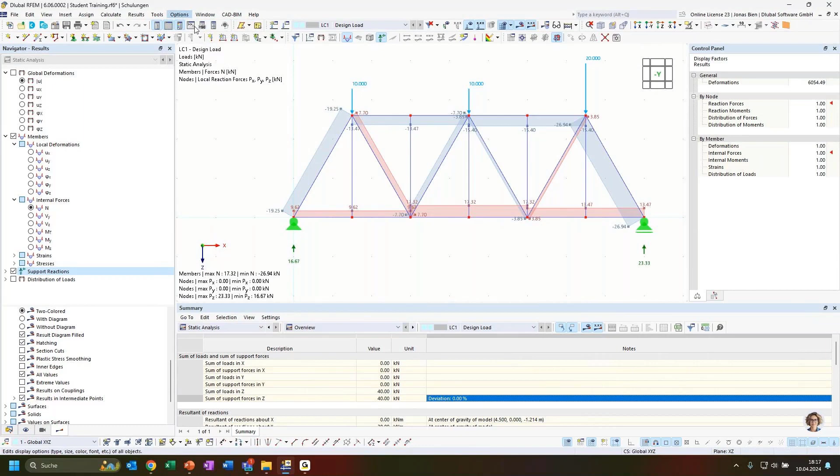So for them, if you want to go a bit deeper and change the size of those arrows, or change the color or the font, you can go to the display properties, options and display properties, and you would find under results, support reactions, nodal supports, settings to manipulate the size of these arrows. You could change the thickness of the arrows, the color of the arrows or of the text, the spacing between the arrows, and so on, and save that.

And you could also generate templates with these particular graphical settings and load them in your next projects. So you can save and load templates for these display properties as well, so you don't have to do this for every model over and over again.

All right, so then I would proceed with the next example, and that will also be a truss structure, but this time we don't want to model it by hand, but instead we want to use the blocks feature to generate such a structure. I want to explain what a block is, where you can find it, what it can do for you, and how it can increase your modeling speed.

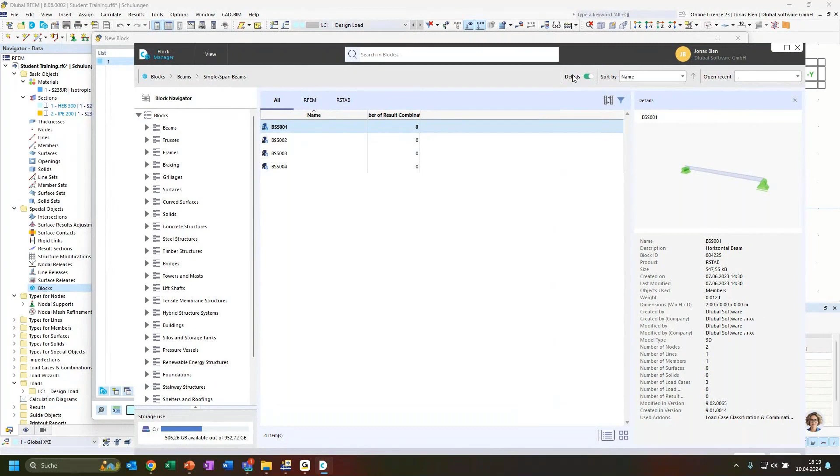Now we want to select a new block from the library. This is where you end up when you go to this block manager button up here. Then this huge library of predefined structures opens, sorted into various categories. For example, we have these 2D trusses here in the trusses 2D category, and the first one in this list would actually be the one we should import into our model.

But there are, of course, several ones with varying complexity, so you could also find the truss that we just defined manually here in the blocks manager. But the blocks manager is not limited to trusses - we also have complete structures that you can import, like bridges, for example, predefined that you can directly import and play around with.

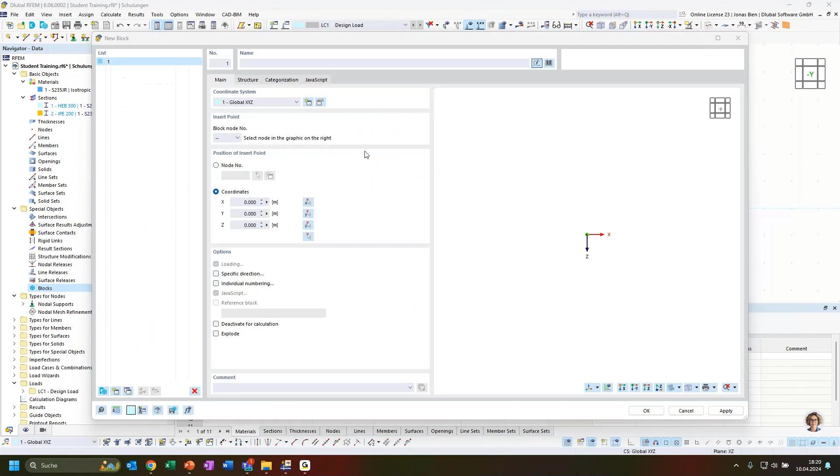The best part I want to show you about these blocks: when I select the truss type we want to choose, you can see that I can now say where I want to insert it in my model. But this block is also completely parameterized. Richard showed you before how you can use global parameters to parameterize dimensions of your model, but these are already parameterized.

Before I generate this block, I can modify, for example, the number of bays. I can use 8 instead of 6, so it would directly add 2 additional bays. I can alter the length of the bays, of the outer bays and the inner bays. Actually, they should be 3 meters, so I directly put in the correct values. The height should be 2.5 meters, and it directly modifies the block geometry in the preview.

I go back to 6 bays that I want to use, and then besides the geometry, I also have for this particular block options to define the sections of the top, bottom chord, diagonals, and verticals, and I will do that as well. So for the upper and lower chord, we should use an HEA profile.

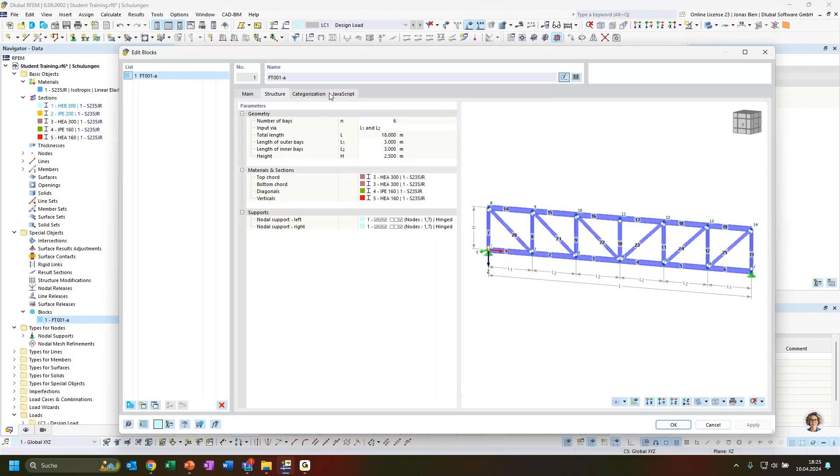And what I also want to show you is what's behind these blocks. These blocks are generated by a script, written in JavaScript. This is the programming language which is used for our in-app scripting at the moment.

The good thing is, if you want, you can modify those scripts. They are locked by default, but you can unlock them and change them according to your preferences. And you can also generate new blocks for yourself. So if you have structures that you use every time and you want to fully parameterize them, you can just create new blocks that you can use then every time in multiple projects again and again.

Of course, it needs some time to get used to this scripting environment and scripting language. But since we have so many examples in our block manager that have this JavaScript deployed, you can load these and copy these, and quite easily learn how to define them and extract pieces from different blocks to generate your own ones. So that's a huge asset, I would say, for tasks that come back over and over again.

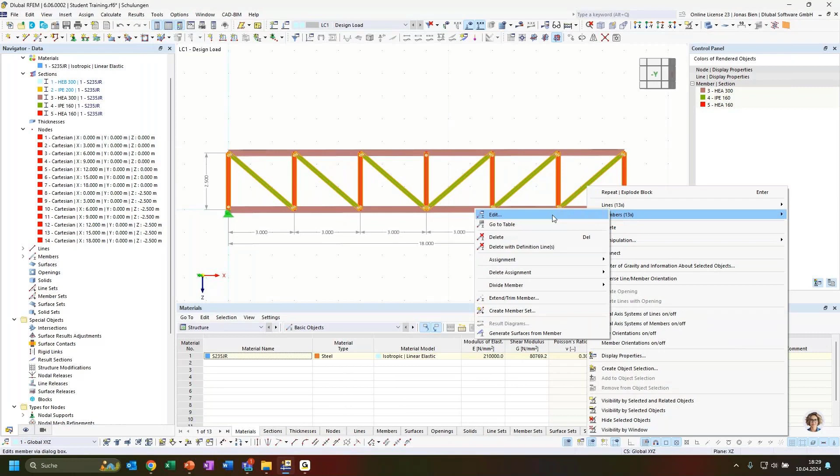And one thing we should do with this model, I think, before we can leave this example: in the block, these diagonals and posts were defined as beam members with hinges at the end to release the bending around the strong axis. But one task was to replace these beam type members with truss members. And these truss members are like beam members with internal hinges. So when we use these truss members, we don't need to explicitly define member hinges at the end to release

the bending moments. And I can just select all the diagonals and the posts, switch the member type from beam to truss member, and that would be it. So in that way, we would have now the upper and lower chord as beam members, and the rest would be truss members. And that should be it for this example. As I said, we don't want to calculate anything here, just to show you what we can do with our blocks. All right.

That leads us to the two more advanced topics of this online training session. And we want to now tackle a more theoretical topic, which is we want to investigate the differences between first and second order theory and how we can change between these analysis methods within our software.

And in order to do so, and also because the time is running a bit, I would say that from now on you just observe what I am doing here and listen to my explanations. If you want to, after the training, model it yourself and try to achieve the results yourself, you can of course come back to the recording and do it step by step. Pause the recording if you need more time to model it or to understand it. But since it's a bit more complex topic, I would say from now on you should focus on the explanations that I'm giving on these topics.

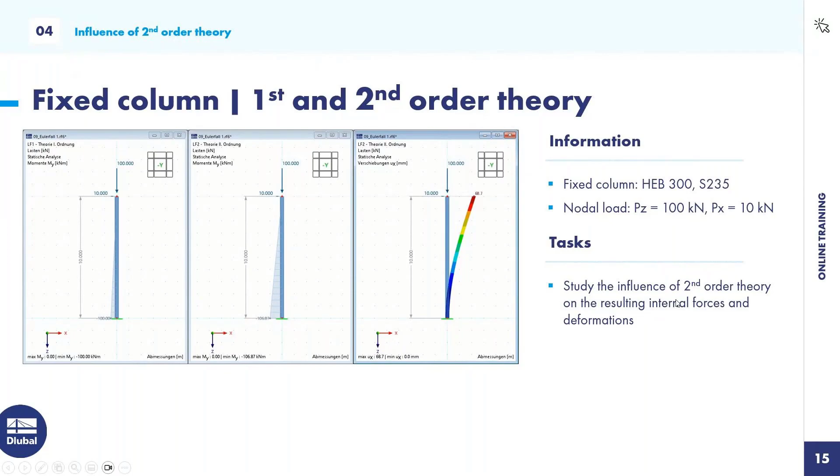And as an example, we want to investigate a fixed column, so a 10-meter column with a steel section, HEB 300 again, with a vertical load of 100 kilonewtons at the column end and a horizontal load of 10 kilonewtons also at the column end. And we want to explore the differences between the first order and second order theory in the first step. All right, so let's model this column. This is again quite easy.

So we model a member type beam, section HEB 300 again, and we want to have a 10-meter long column. And it was also said we should fix it completely. So at the column base, we have a fixed support. So that means not only the translations are now constrained, but also the rotations at this point. You can also see that since we have switched to the 3D model, we actually have 6 degrees of freedom that we need to take care of. So that means 3 translational degrees of freedom, so movements in X, Y, and Z axis, and 3 rotational degrees of freedom, so rotations around the X, Y, and Z axis. All right.

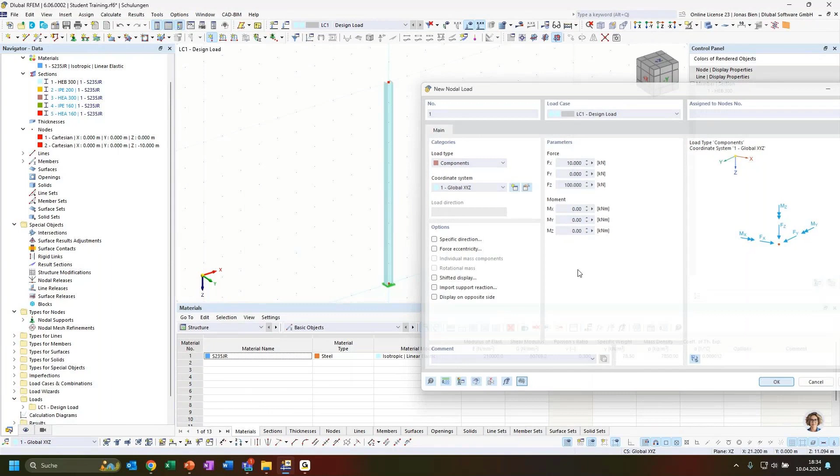Then we need the load at the column end. That could be a nodal load. And we should apply loads in 2 different directions. So we could use 2 separate definitions for the nodal load, one for the load in Z direction and one for X direction, but we could also switch to the load type components. And here we can directly input each force parameter and moment value at the same time. So I just have to do one definition for our loading. I want to have a vertical load of 100 kilonewtons and a horizontal load in X direction of 10 kilonewtons. And when I assign that to the column end, we see that this load is now displayed at the column end. Okay.

Now, in the first step, let's see what the results would be using first order theory. So we just use the default settings for the solution that we used along this training session and check the results. It should be quite obvious, at least when it comes to the internal forces. Of course, we have an axial load of 100 kilonewtons in compression, which does not change over the height of the member.

Then we have a shear force in the strong axis of 10 kilonewtons because of this 10 kilonewton at the column end in X direction. And this also generates a bending moment along the length. At the column end or at the column base, this results in a bending moment of 100 kilonewton meter, which is the product of 10 kilonewton times 10 meter height of the column. All right, so nothing too fancy.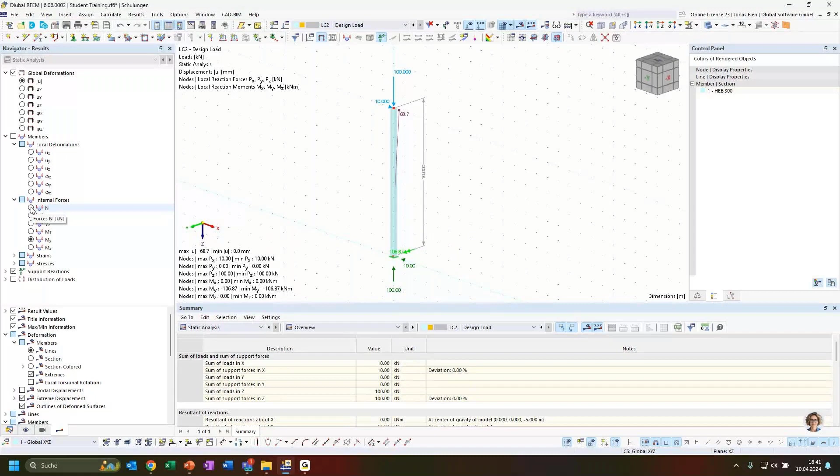The axial force is still almost 100 kilonewton constantly over the height. But there is a rather large difference in the shear force over the height and also in the bending moment. So if we analyze the bending moment values, maybe we can also set the wireframe model to see that. Oh, we can't really see that on the top node.

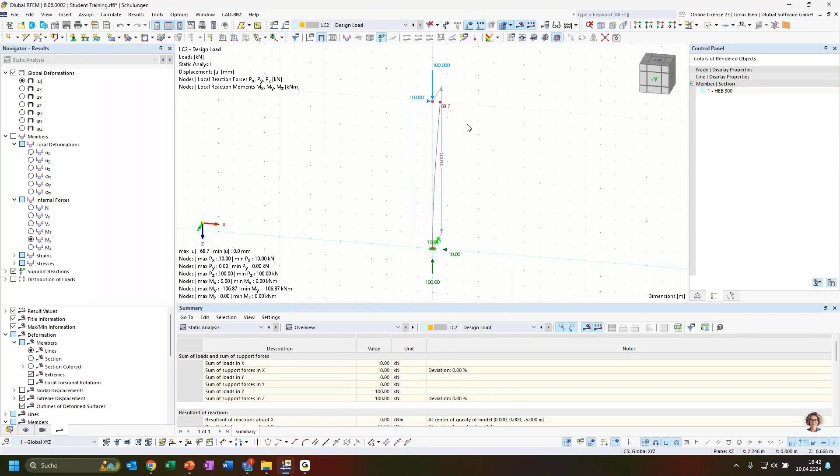But we see that at the rigid support, we have now an increased bending moment, and that increase of 6.87 kilonewton meter directly corresponds to our vertical load of 100 kilonewton times the horizontal deflection of the column at its tip, 0.068 meter. That gives us an additional bending moment of 6.8 kilonewton meter, which is what we get here as a result according to second order theory. So we get an increase of the bending moment due to the deformation at the column end and the applied vertical load.

I also want to show you how you can compare the results maybe a bit more easily. You could, of course, always switch between the load cases to show the different results, but you could also generate a new window for this model and then split the view vertically to get this result 2 times, and then you can on one window switch to load case number 1, and on the second one you analyze the results for load case number 2, and that would make it more obvious if there are any differences

in the results. So you can then always activate one of the windows and adjust the result quantities to check and compare directly the results. All right, but let's switch to one window and concentrate on the next information I will give you.

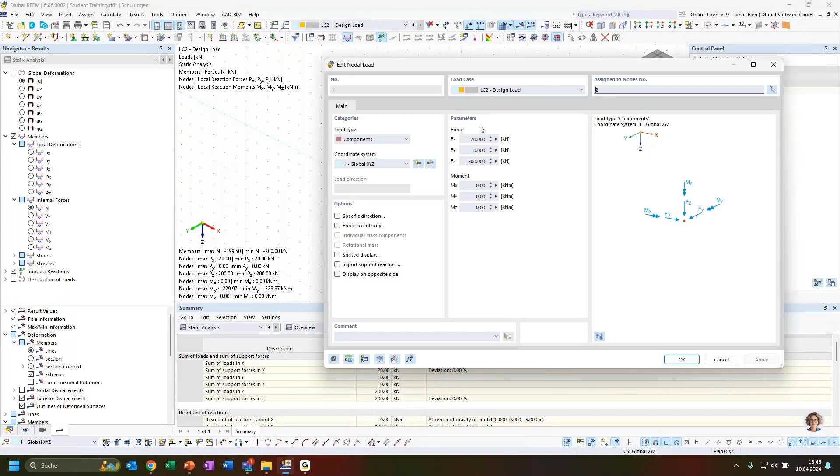So we no longer have a linear proportionality between the external loading and the reaction force. So that needs to be kept in mind. And we could increase that to a point where it's not even possible anymore to find a converging solution, because our structure will get unstable. Which means that due to the horizontal displacement and the very large vertical force in this case, our member wouldn't be able to withstand the bending moment anymore.

And this would then lead to an error when we try to calculate the system according to second order theory with such high forces. We would get a warning message that the structure is unstable and cannot be solved anymore. So we cannot find a convergent solution in this case. And this is, of course, very critical to keep in mind for slender structures.

And of course, you could perform a second order theory and increase your loading until it fails to find this instability load, so to say, the critical load when the structure gets unstable. But we could also use another tool to directly find this critical load that leads to an unstable structure. And that is, so to say, the introduction to the next topic that I want to go through with you.

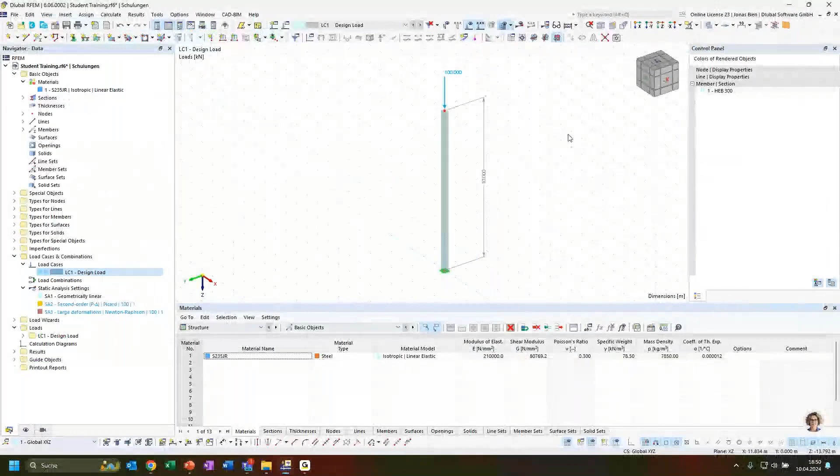And for that assessment, we can use a linear stability analysis or eigenvalue analysis in RFEM 6. But to have access to that, we need to activate an additional add-on. The first add-on that we get to know in this training series, and that's the analysis add-on Structure Stability. When I activate this add-on in the base settings of my model, I get the option to calculate the critical load for a specific load case or load combination that I defined.

So in this case, I'm back to my loading under first order theory, and I want to calculate the critical load of my structure under this load using a linear bifurcation analysis or eigenvalue analysis, and calculate the critical compressive force that leads to instability.

So I can activate this critical load calculation here in the load case or load combination tab. I have no load combination, but I could do it the same way there. And then again, as for the static analysis settings, we have two predefined stability analysis settings.

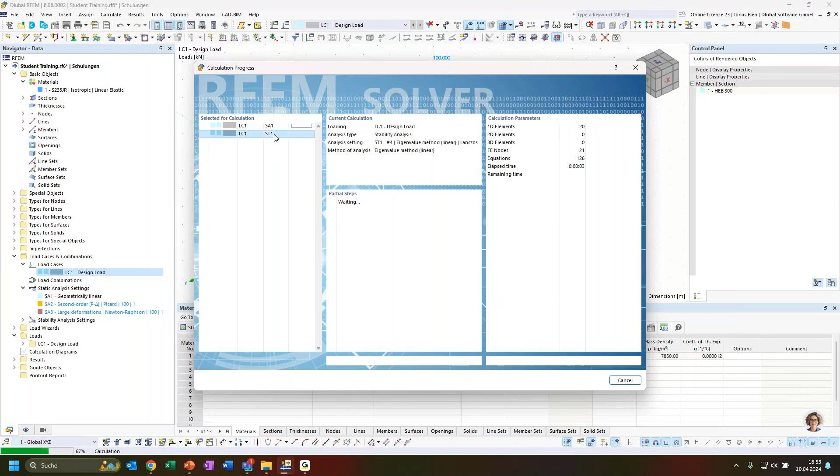And then there are also some different solvers that we can use for the eigenvalue determination. But again, here for such a basic problem, the standard settings are very well defined, and we can go ahead and calculate the load case with this additional option to calculate the critical load. And now you see that before the structural stability analysis is done, actually a static analysis is done, because the loading in the system must be known for the eigenvalue analysis.

And accordingly, we get for this load case now 2 different result options. We can choose between the results for the static analysis. That is what we have investigated so far. So we have investigated the deformations and the internal forces and so on. But we now also get the results for the stability analysis.

And this is interesting because it gives us the critical load factors. These are the factors that we can multiply the external loading with in order to get our instability load, or the critical instability load that leads to an unstable system. And we can see them in this drop down here and also in the table. Then we also get a magnification factor.

This is basically a value that can be sometimes used to determine forces according to second order theory by just multiplying first order theory internal forces by that factor. In some codes, for example, in steel design, this is sometimes allowed, and a way to calculate second order theory bending moments without actually calculating according to second order theory. But this is not very commonly used.

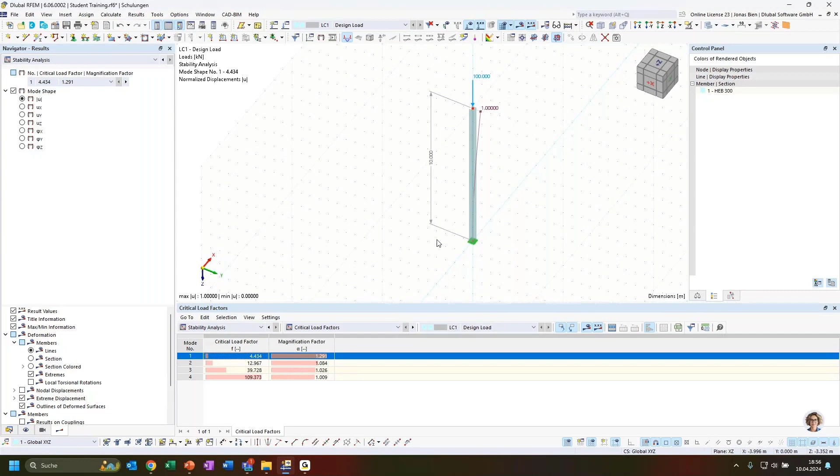And in addition to these critical load factors, we also get deformation shapes for the modes where this critical load factor is corresponding to. And again, as in the static analysis, I can show the deformations on the section colored.

And now I see directly that the first mode shape that I calculated corresponds to buckling of my cantilever column around the weak axis. The second mode shape has a higher critical load factor, so that mode shape would occur at a much higher vertical load, and it corresponds to buckling of this cantilever column around its strong axis.

And now I calculated the critical load factor, or the first critical load factor of 4.434, and that would actually mean that in a second order theory analysis, I could apply a vertical load to this column of 443.4 kilonewton.

So we can check that by just again copying this load case, performing a second order theory calculation, and adjusting the vertical load to 434 kilonewton. And this should still give us a stable solution. This should still work.

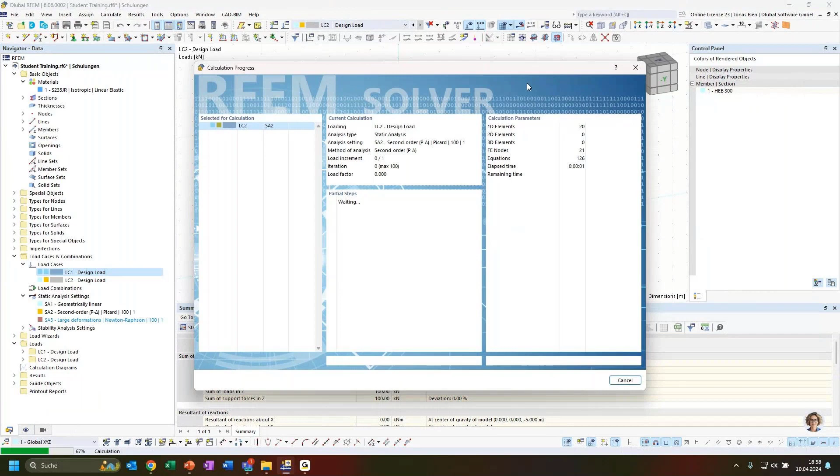Let's again analyze. Okay, I messed up the number, so it should be 444 kilonewton, which shouldn't work anymore. So that's above our critical load that we calculated with our structure stability add-on. And this should actually fail. Yeah, and it does. And now it again gives us the error message that the structure is becoming unstable and we cannot find a solution when we want to calculate this according to second order theory. So this is a nice finding with our stability analysis add-on.

And we also get a third and a fourth eigen mode, which are higher buckling modes of the member, which are not really interesting for us because in the end, most likely the critical load factor for a structure will be the smallest one. But the critical load factor and the eigen shape are not the only interesting outputs of the analysis. We can also go to the results by member table, and there we also get effective length factors and effective length values that we can use for stability design

of this steel column. So if one of you has already performed a steel design or a stability design for buckling of such columns, you have probably used the equivalent member method, and for this method you need as an input the critical buckling length. And actually this critical buckling length is calculated for you for a particular system by our stability analysis add-on.

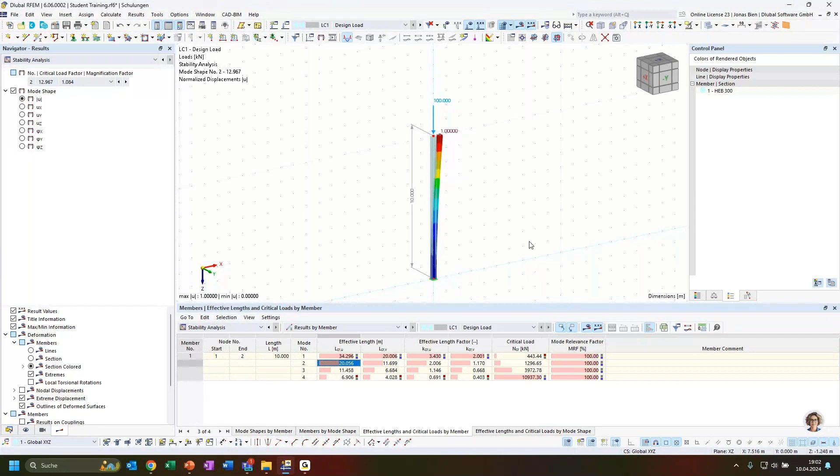Yeah, so you could ask, why is this important? I mean, for this particular case, I could also look into any good textbook. It would give me the analytical formula that I've just shown you, and I could easily calculate my instability load and the effective length factor from these tables. That is, of course, true. But with our design add-on, we can also calculate buckling length for systems where it is not so obvious.

For example, and this is the very last example, we could turn this column into a simple moment resisting frame. I will just duplicate the columns and add a girder to connect these two columns. Apply 100 kilonewtons to each of the columns, and now we could do the same analysis that we have done just before with one column. We could even leave the length at 10 meters. It's not exactly what the example asks us, but anyway, we should get a solution, and for comparison reasons, it's probably nicer to keep it as it is.

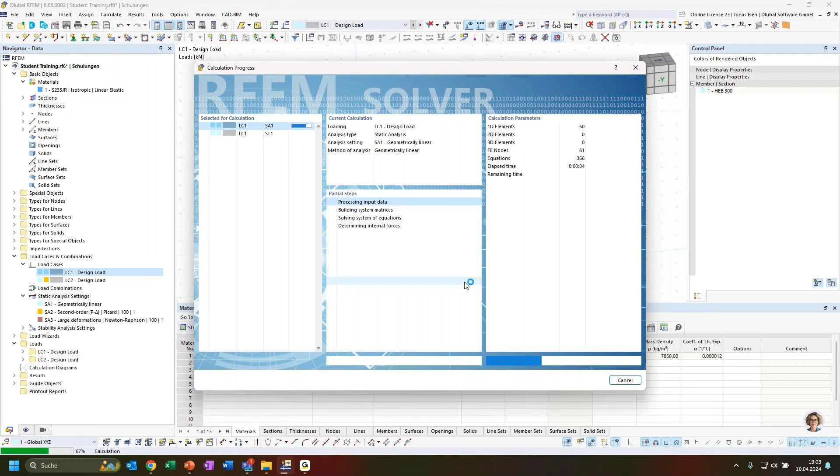So again, we would calculate our static analysis results, and what we get here as critical load factors is quite interesting, because we see the first critical load factor didn't change at all, because for buckling around the weak axis, it didn't help the system that we now have a second column connected by a beam. The whole frame would buckle around its weak axis and would have the same critical load factor as before. But let's take a look at the second mode shape.

Okay, this would be asymmetric buckling, but also out of plane, so around the weak axis of each particular column. In this case, the girder would also not do much. But now, when we analyze the third mode shape, that would represent in-plane buckling of our frame that we just generated.

And now, for this kind of buckling, the critical load factor increased from 12 to 38, because we have built a frame, and this girder, this horizontal member here on top, it actually increases the stability of the system significantly. We can already see that by analyzing the critical load factor for buckling around the strong axis of the columns.

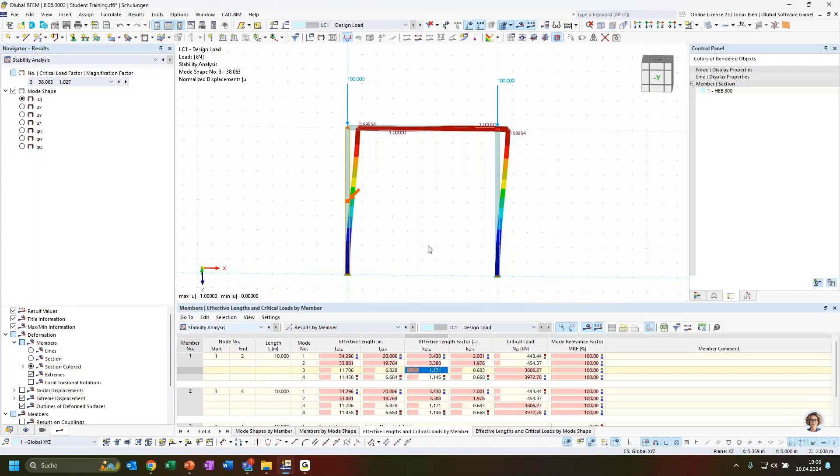For our mode shape number 3, which represents this in-plane buckling, we could derive our effective length factor for the equivalent member verification check for this steel column for the Steel Design add-on, and in this case it wouldn't be 1 or 2, which we would get for Euler case number 1 or Euler case 2, but some value between.

This specific effective length factor for such a case would depend on the dimensions of the frame, height and the bay length, but also the stiffness of the 2 or 3 members, and also on the loading. The loading could also be different for both columns, and that would also affect the effective length factor for the columns. For such problems, we could use the Structural Stability add-on to analyze not only the linear bifurcation loads or critical load factors, but also the effective lengths that we can then use for the design of the columns.

So what we talked about last is basically this last example that I just briefly showed in the PowerPoint. We did that a bit quicker on a simpler model, without such large changes—we minimized the amount of changes we needed to do to the model just to create such a frame and to show you what the purpose of our calculation actually is.